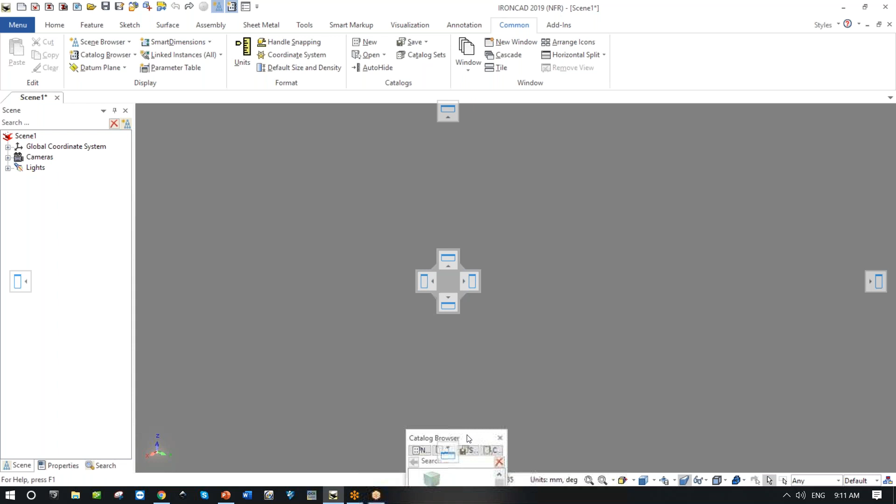Now, I have some friends who like to set this up in a different location, so I'll show you. If I wanted to set it up down here, I pop it at the bottom. Now I have the same capability where I can look at it and decide what I want to do. I want to grab a slot and bring that up. Everything works exactly the same way. And at any point, if I want to reset it and put it somewhere else, I can lift it up and drop it over here.

Here's a quick tip: I've grabbed this and moved it into an open space. Double-clicking moves it right back to where it was. So you can really control how this thing sits on the screen.

I'm going to make it longer this way. And now, I want it dropped back over there. So you have control of that.

If you lose things or can't find certain settings, it's really important to know where the common tab is. It's up here at the top, and you can use it to find and change these units back and forth. That's important.

I'm going to go through some of these things in great detail so you can see them.

Other important things to recognize, I'll show you different things as we go along. I'll go into part mode, but every command matters, and one of the most important things is your keyboard commands, which are quite important. I'll show you some keyboard tips in a moment. But basically, setting up this screen is really important, and you have the ability to add any kinds of things.

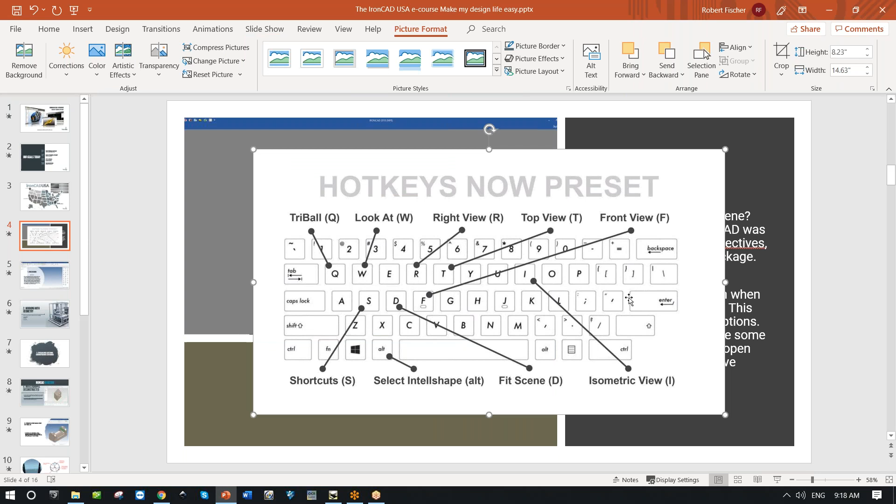All right, this is the one that I wanted to show you all. This is kind of a neat thing that I just want to... these are the hotkeys that come preset when you originally get the product.

And oh, come back here, you silly little thing. Where'd you go? Sorry folks, I've got way too many windows open now. Let me grab that, but where are you, you silly little thing? It went down again. I am looking, by the way, on my other screens for those little guys, but I don't see them, so they're not here. I've lowered everything, but they're not here. So I'll come back to that in a moment.

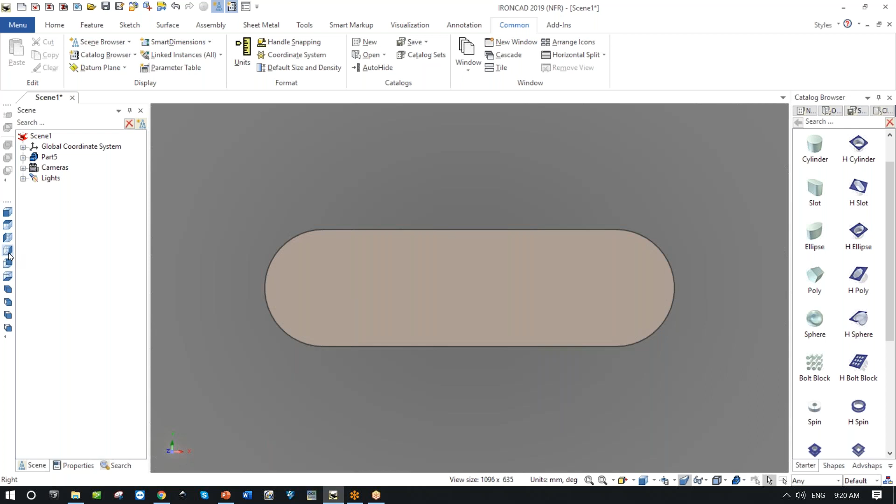And now I've got, let me look at it from here, and I've actually got something which is faster, if you will, and takes up very little space. And I don't know about y'all, but as I got older, I realized that hunting down here and going, oh, I've got to get this tiny little thing and press it, it made it difficult to use. For those of you watching, if I have to find a tiny little button like this all the way down there, that actually takes a lot of time for me, and it's frustrating. And the reason it's frustrating is because it is taking my focus away from what I really want to see.

Oh David, I see your questions in the chat window. Let me get to those in a moment - for example, does it support Siemens PMI? We'll get to that, but we're going to stay in the first half an hour or so in very basic mode.

We're going to stay in very basic mode, and then I promise we'll come to those more complex questions in a moment. David, you good with that? Can't hear you, but go ahead and answer anyway if you want.

Working with that, there's a lot of different things you can do, and as I said, there's these buttons already. I'm liking the way my system is working because I'm getting a much easier result. I'm going to show my face again so you can all see me for a moment - those are tools you can use if you don't have a space ball.

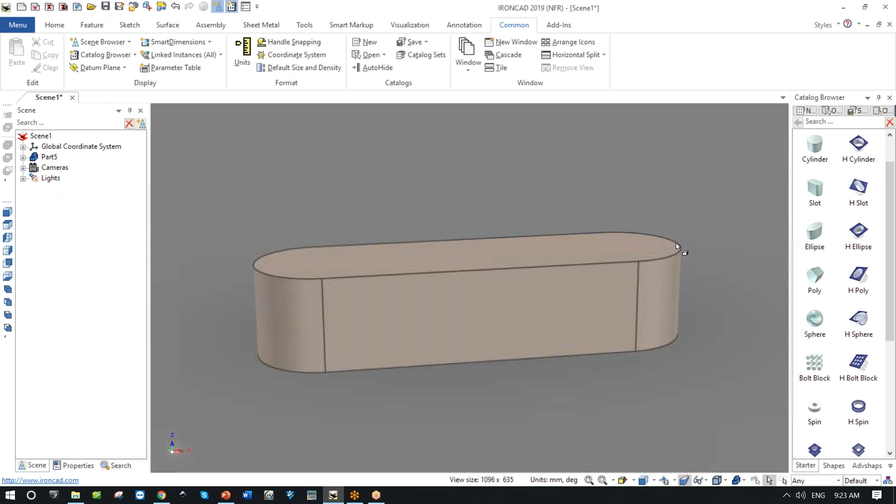So you'll see me working, and as I'm working, I almost never - and this is just me, so it's something I would recommend to customers - for me, I can actually be looking at things and moving them around in a very natural way.

As you're seeing, I'm able to come in and very quickly pick on an edge or something like that and do a quick blend, whatever I'm working on. I'm working in a way that to me is very, very natural.

And if I do things like this where I'm going to say shell, that's just showing you how this is going to work. I'm creating a very simple function because I'm able to control how this thing works at any time.

All right, so back to the scene browser - as I said, I'm just going through these different parts to show you the interface itself. Now, not just the interface - remember, it's not just the interface I'm talking about, but also the way things work and the way the actual objects work.

So we're going to spend some time today in drag and drop modeling, but let's talk for a moment about blocks and how they come in - these features. I'm going to bring in a quick block there. There's my block. One of the things I think people may or may not know is that you can actually determine how things are going to look in the scene.

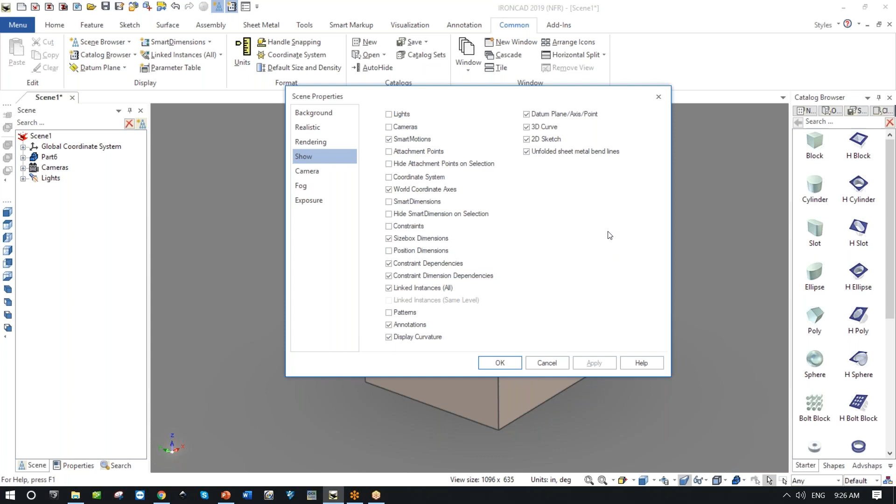So when you're setting up your scene, which is what we're looking at now, I have control over everything. First thing is, what do I want to show? Do I want to show my lights, camera, smart motions, attachment points, all these different things? No, I really want to see the size box dimensions so that when I'm working with geometry at any time, it will show, oh, 25 by 25 by 25. Instead of just this one big fat guy here in the middle, I'm able to see this on any of the things that I bring in anytime.

Oh, where are you going, little guy? Oh, you're very small because I started and switched. How big are you? Oh, it's a 1 by... they're on top of each other because it's too small in the metric system.

So I'm dropping these in, but any of these that come in will automatically have this attached to them at any point. Let me get this back again, and this is that double click. By the way, I'm seeing something out there that I don't like, so I just click and hit delete.

All right, now what else is customizable here? Well, gosh, I don't know - the background. Let me look at the background. Oh, any color that you would want - change the top color, make it white, and go ahead and do that. So now I've got a different color background.

What other things can I do? Quick tip for people who have never done this before: every IronCAD installation comes with a texture catalog. So this is rather silly what I'm about to show you, but why not? What if I'm working and I want to have something that shows a wood background? It looks a little bit odd, a little bit silly, but I've just created a wood background that allows me to work that way.

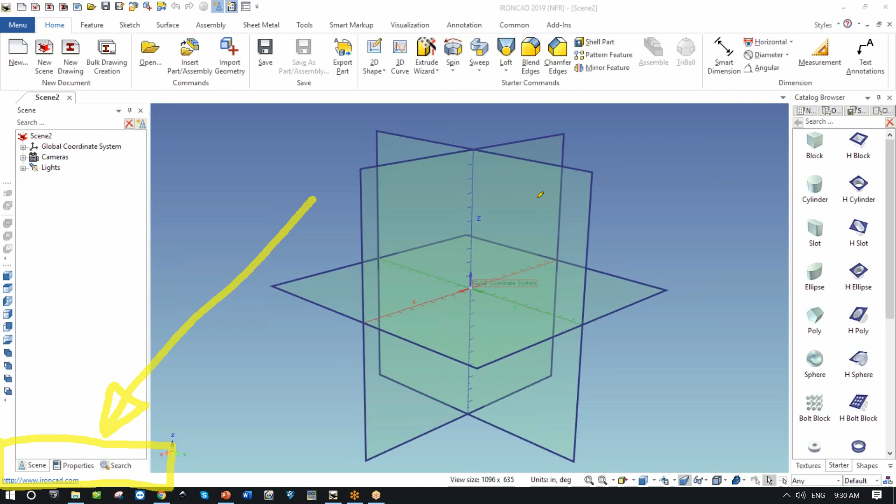And I don't often go here because the fact is I can find most of what I need in the catalogs. But there's also three very important areas I want to show you because it will help make your design life easy, and that's down here. So what we've got is this area, and I'm showing that to you so you can really see it - it takes me a little time because I've got to erase all that stuff.

So what does that actually mean? Well, right now nothing is selected, and this is a rule I really want you to understand: when nothing is selected, it's only showing me the options that are available in this scene right now. Because nothing's selected, I say, well what can I... oh, show me the coordinate systems. Oh, I turned them on, show them to me.

Some of you might have run into trouble where you did that and it didn't work. I'm going to open up a new scene so you can see it and see what happens. This scene is different, and if I say show the coordinate system... I don't want you all to go back and try this and go, gosh, he just showed this to me and now it's not working. So I opened up a new scene and said show the coordinate systems. Bobby, why aren't they showing up on the screen? I want to see them, I watched you do it in the webinar. The reason for that is the following.

There's a right mouse button, which brings up another issue I want to talk to you all about. Matthew, if you're listening, this is one of the most important things for you to know. When you're working with IronCAD, the left mouse button... let me just get whoever that is muted for a moment. Joe? Gotcha.

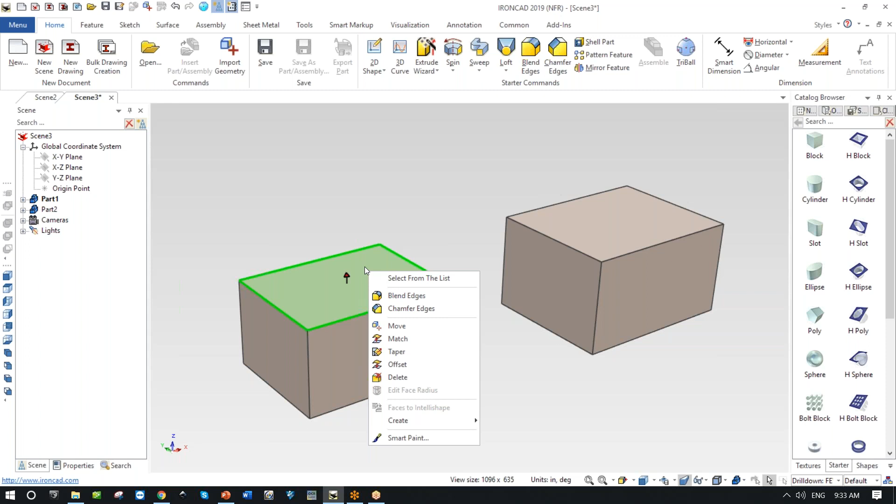So you're seeing it's context sensitive, and the same thing is absolutely true everywhere in the product. So if I'm over here, remember I was really saying, why is my coordinate system not showing up? I'm clicking it over and over again, and it's not showing up. The reason is because over here it's been set, right mouse button, it's been set to hide. So it's hidden when you first open it up. If I bring it back here and undo that, I'm undoing all these things. In any standard scene now, I can show this coordinate system so I can see where things are sitting.

Now for all of my designers sitting out there going, Bobby, you've told me I don't need a plane with IronCAD, we don't need it to sketch — you're right. But sometimes for people who have to export to a CAM system for computer-aided manufacturing, it's important to know where things are sitting. So I'm just showing you this idea.

Now you'll notice I'm able to control the scene this way. So what I'm really talking to you about is not the coordinate system as such, but the fact that you can control all of the things happening in this scene. So everything we're looking at, whether it's the lights that are being used — I only have one camera action, and these are the different lights that are affecting what's happening. I don't want to get into the details of what the lights are doing, but there's a lot here that you can show, a lot of information you can get for the scene. And what's really important is even this idea now.

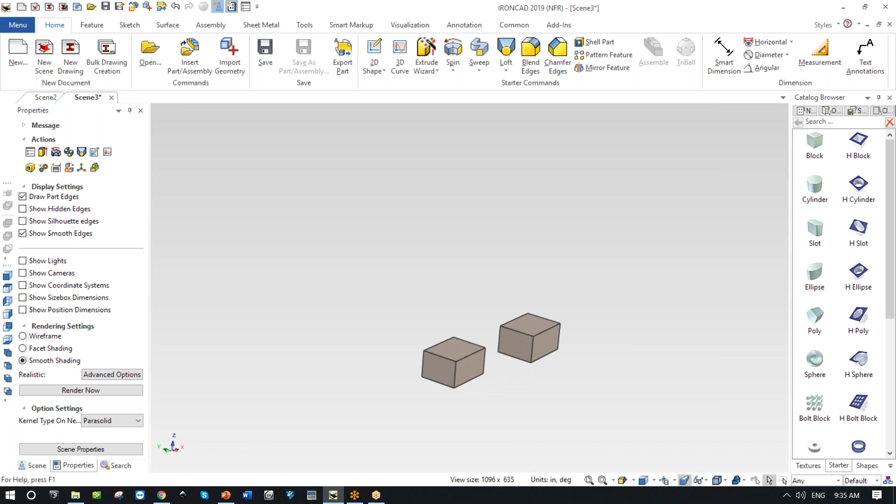The subject of this webinar is make my design life easy. I don't like menus covering up my geometry, because when I'm working on complex geometry, I'm thinking about the problems in front of me. I don't want to be floating through this kind of thing. So I love the idea that, guess what?

You don't need to. The properties of anything that you point at will always be over here. A lot of people don't know this, that the properties of whatever is highlighted right now is over on this side of the screen. You'll notice here I've got this highlight, so it's in part mode, and this is what I can do with a part. All of these features are what I can do with a part.

So the fact is, I could right click and say shell if I wanted to. But the other thing I can do is just come in here and say do this, and the shell will be over here, right up here. All the different things I can do with a part are also here. And in fact, I find it's easier rather than picking through this. Personally, I know that if I'm there, I can just go shell, open up the top, and I'm done. So I shell my part.

Oh, shell thickness is a little too thick. So yeah, it's small, so make it 0.1. I'm actually just having fun working with this, and you can see now anything that I point at. So that's really kind of a neat idea.

Show the dimensions. Now when I get in, there's the thickness, whatever I want, make that bigger, smaller. There's the sizebox. No, I want this to be, there you go. Changing, and I'm actually watching it update live.

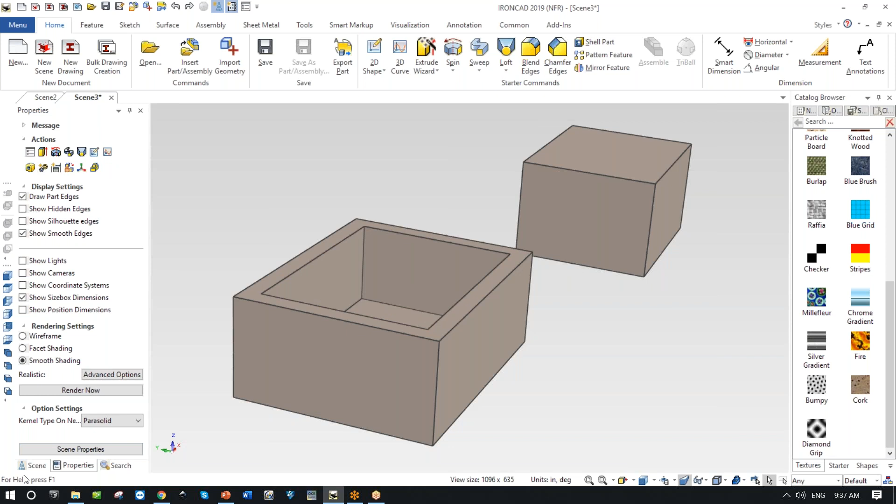But that's the first part of our webinar, really talking about these properties. And if you're interested in how to actually create your own templates and save those, it'll be my pleasure to show that to you at a later date. I'm going to move on. Anyone who wants to see this, you can contact us and ask questions.

There are a number of questions in the chat box that I've got here, and we're going to come back to that. Oh, nicely done, Matthew. I spoke yesterday to Matthew, and he has installed his new mouse. Have you actually installed it and bound the keys yet? Have you learned how to do that? On my personal laptop, yeah, it was super easy. Okay, great, no worries.

That's really cool. So let's move on - are there any questions on the scene? I'll stay here for a moment because I don't want to move off this immediately. The idea was that the first thing was setting up the scene and looking at how it works. That was the first step in what I wanted to show you. So we can, of course, add your own default templates, and as I said, I would show anyone how to do that if they want.

Now I want to talk a little bit more about how this actually works. This is a default scene that we've looked at. We have the history tree, and I'm going to talk more about what the history tree is. Each part has its own history, and this will be clear from drag and drop. We're going to talk about Intellishapes as well.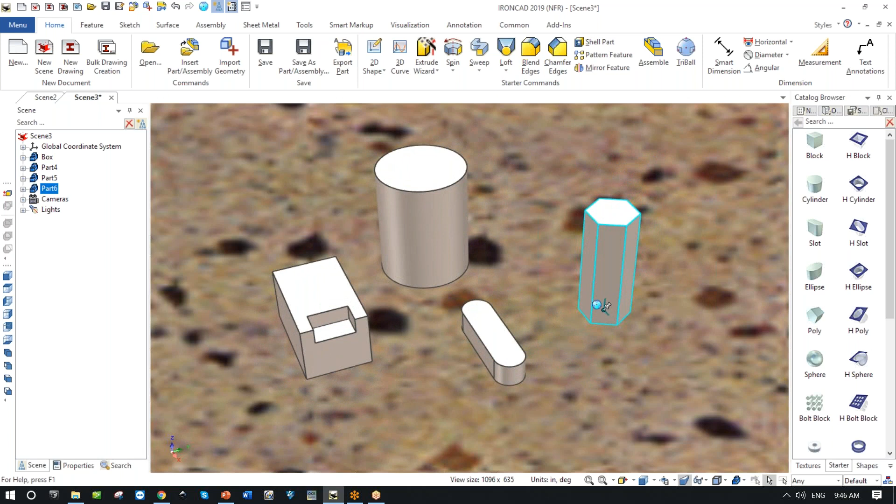We'll talk more about drag and drop and how you can create your own. But as you can see, they're coming in, and I'm dragging each of these into a new location. As I drag them, it's renumbering them, going, oh, this is part 4, this is part 5, this is part 6.

Well, you know what? You guys, shift select, go away. I don't want any of you. Double click, come back to the screen. Remember, T for top, right, front, ISO, all of this.

Well, what happens when we're working with these shapes? What would actually happen - and I'm going to delete this just by highlighting it and getting rid of it - what would happen if I go in and edit the original sketch that was created to do this?

And I think this is a really important point I try to tell people: if this was created by a sketch, and if you're used to using sketches, you know what, you kind of bug me. Give me a background.

I'm just going to use black, just so we can see it better there. Oh, I think my texture is in the way. Hang on. You don't argue with me. I didn't want to save this. Undo until I get rid of it - I want my texture gone. Anybody got an idea how to get rid of it other than what I'm doing?

Just like that. See, by the way, folks, something to know about parts: when you come into IronCAD, this is something that is set as a default. And I won't move quickly because I want you to be able to control this yourself. Number of undo steps, right here.

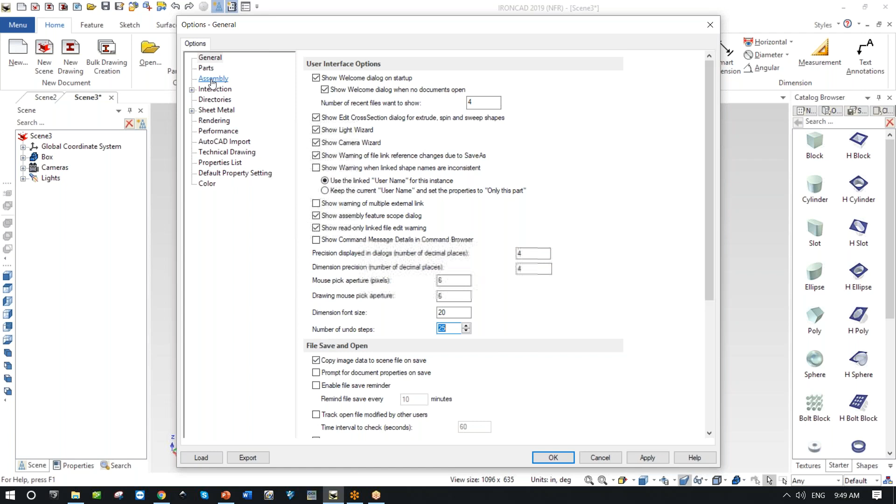This also reminds me of something as we're working with parts. Some people have complained that when working with a part, it doesn't look very smooth. And it's especially true sometimes if I bring in a cylinder. Let's make this, oh, I don't know, 22. And it's a double click, so there it is.

People have often said that if I zoom in on this edge, it can start to look a little bit blocky - you know what I'm saying - and it looks like these lines don't look like a smooth edge. Well, at any time, if I want to increase the surface smoothness of this part, the default is set to 60. A lot of people like to say 100 will make it a little bit better.

And this particular part property, this one was created - let me take a look. Here's the surface smoothness, you notice the 60, and I can take it all the way up and say, okay, go ahead, do that again.

Now, you may not have noticed this over the internet, but as I did it, this became much smoother. So if you're having issues there, these are the parameters you can get at that will help make the parts smoother, more beautiful.

Back to where I was, I just want to bring in a simple block. What we're talking about now is, how was this created? Created with a cross section. Simply highlight the cross section and say, edit the cross section. I'm going to go here and just say edit this. What is it? Nothing more than a simple sketch.

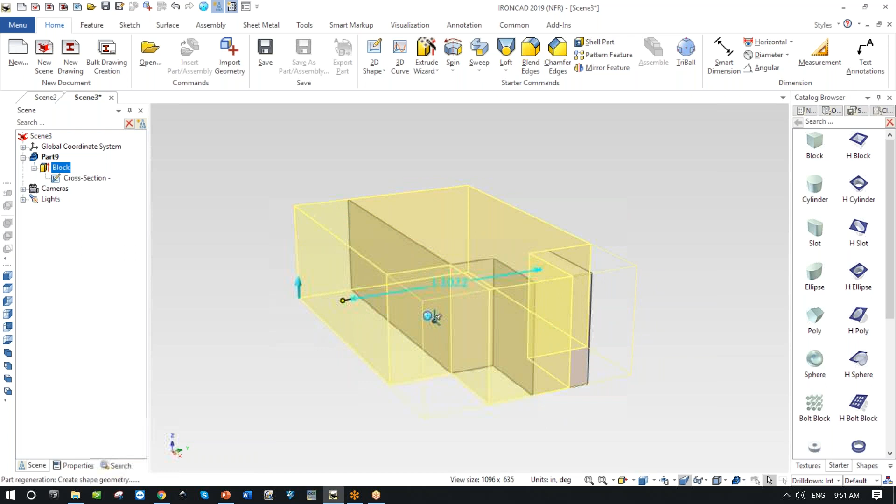When I'm finished, my block feature now has this added to it, because I've taken it and changed whatever I want this thing to be. And now I still have these handles, kind of nifty, showing me I'm able to create. Before I go too far, I do want to show you something quite marvelous.

That is, I have my own catalog here, and we'll be talking about this idea. With my catalog, I could simply say, you know, I really like this block with extrude or something, I don't know, that's what I like to call it, because I'm going to use this again in a future design job. Now what I'm going to do is pick up this block with extrude and put it right there.

Now anytime I want, I've got a new one that I can use. So at any point, if I'm working with different parts and I bring in a part and say, now I want my block with an extrude right there, I've now added that block to this. I'll show you more about what I did, because it's kind of fascinating the way it actually worked. This block had the ability to actually become part of this because it was an Intellishape.

So it's actually added itself to this block. Here's a blend block, and the block with extrude is just another feature inside this particular one, because now, oh, I want it to be blended this way, and now it's part of this. That's a really neat capability, that I can quickly and easily alter and use this as if it were part of the geometry. This drag and drop idea of creating your own features is really very clever, and I've not found it in any other system.

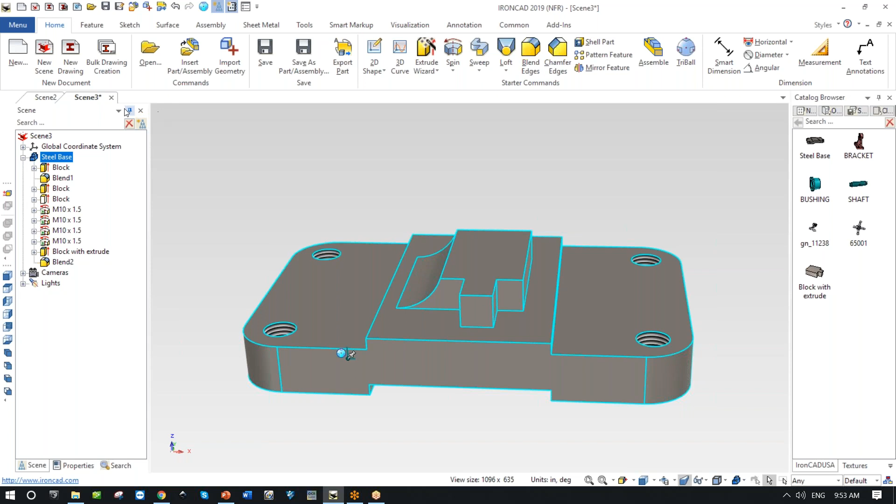So let's actually create a part so you can see how it works. Instead of just playing with what I'm doing, I'm going to come back and say, okay, stop these things. I'm going to start completely from scratch, and we're going to go through and create a new part that we're going to take all the way through so that you can see it.

I'm going to start out with a 3D scene, and this time I do want it to be an inch scene. I know that this one I've got is inch, so I'm going to use Bobby's scene. Why did I like using this one? I'm going to bring out from the simple starter menu, and you may stop me at any time. I'm actually going to just drop a block out here and make it 3 1/8 by 1.5 by 1.5. I'm going to grab this block, bring it out.

Now, some of you who can see this may notice that it's got a bit of a shadow on it down here. I like to know where the 0, 0 is, and this lets me explain something else to y'all. Anyone know where that got dropped?

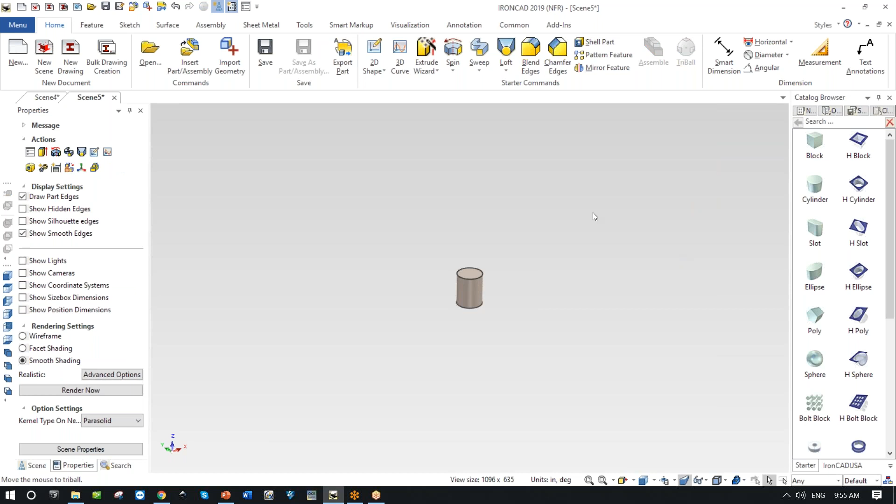Well, if I turn the TriBall on here and say edit the position, it was the first part that got dropped in the scene, and every time it's the first part, it automatically drops it at 0,0,0. I've had this question a lot, so anytime you start a new scene, whatever it's going to be, now when I drop something, even if I drop this cylinder up over here in the corner, it dropped because it's the first part. If I bring up my TriBall, it drops everything at 0,0,0. So the second part that gets dropped, if I drop another part over here with the TriBall off, of course it's in a different location because I dropped it way up here in space. It's important for you to realize that when you first start up, that first drop is actually at 0,0,0.

I have a little shadow down here because I like to know where the bottom of this is. When I turn it upside down, the shadow turns on, so I can slightly see it. If you're not seeing this over the internet, this is where I look at my background or the realistic rendering, and I challenge you all to play with this because it's really fun.

Here's a simple shadow. No, I want it to be a little darker. Now what you're going to see is when I come back, the shadow is getting darker so I can really see. There's a lot of different things here for people that are new that you can play with, like, oh, I want to reflect the part.

Now when y'all first do this, you may or may not see this over the internet, but you'll see a reflection that kind of bugs me, because what happens is it comes in almost at 1:1, so you're seeing a very bright reflection. I'm showing this to you because I don't want you to see it, and I'm not going to attenuate this, because that's very confusing to me, I don't like to see it. So I see extra geometry, I actually turn that off so I'm not looking at it. I've got my simple shadow and go from there, so I can just see where the part is.

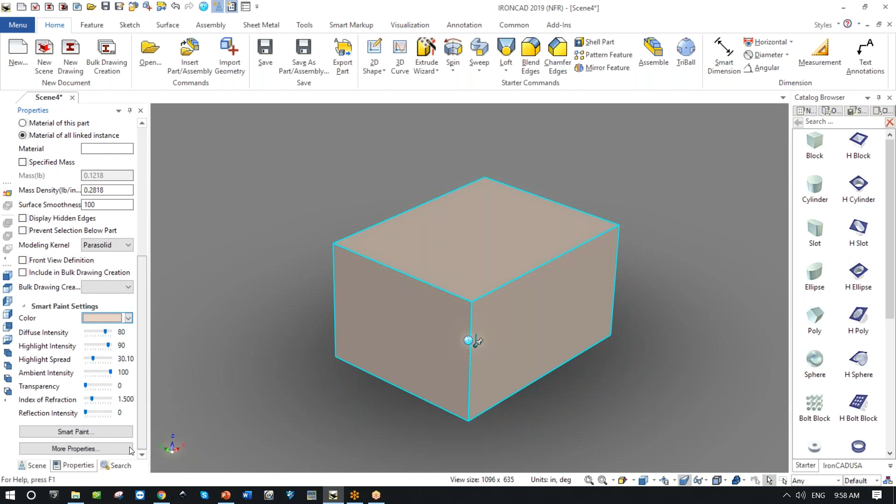I can put all this in one now if I want, or any of the information, I can change its material. There's lots of information that has to do with the part, including a quick access to the color. I want this to be a green part - there you go, I like that color better. Of course I can change all the intensities of the color, or I can use the special feature called Smart Paint, a right click, and I can say, what are the different finishes I could use? I want to make this shinier, what colors, what transparency, because if I want this to be a transparent part, I can look through it. Nope, I don't want any transparency, apply that again. I can make reflections, and I'll show you a lot of this as we talk today. So that's what I wanted to show you there.

Let's go in now and actually start creating real geometry with this. I could show you a really neat trick, but somebody asked me this yesterday, Bobby, if I'm going to create this and I want a rounded end here, how easy is it to create a rounded end? Let's actually look at how we would do that.

We want to add fillets. There's a number of different ways of blending. You've already seen that if I pick once, I get the part. If I pick twice, I get the IntelliShapes, which lets me change the size. Oh, by the way, I forgot to change the size, so let me go right here now. I could do these one at a time, by the way. I could drag this way.

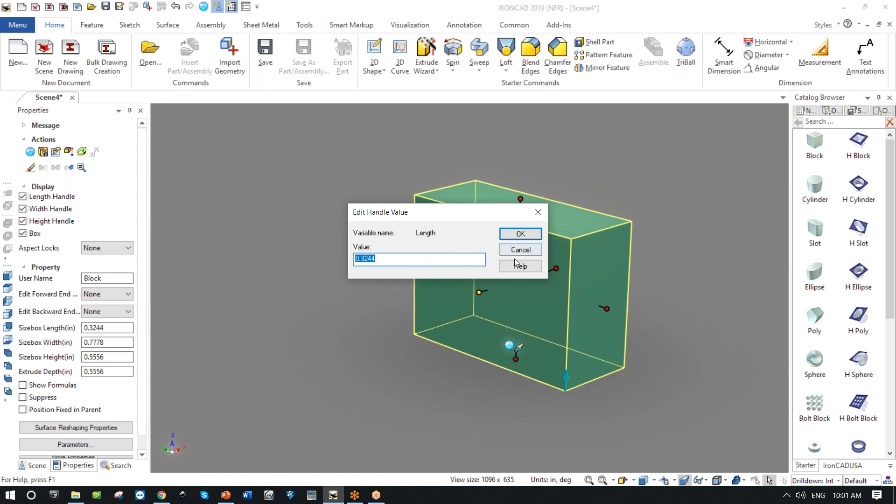It's very useful because right now, what I told everybody before is that I need to create this box. So if I click on that, there's a little option, I can click on it this way, which is more intrusive, or do this, which gives me a box right there, say 3.125. Then it flips to the next one, which is 1.5. Unfortunately, it's off the screen. Bring it back again, and I want this 1.5 as well, but lost a little focus. So it's here so you can enter information in rather quickly, that's the idea behind it. Yeah, that's the entire point, we changed it before. It was a smaller text box, but you couldn't do that rapid prototyping with the dimensions.

So again, I'm going back to something I pointed out earlier, that I'm looking at this box and I wanted to make it 1.5 by 1.5. This is kind of a neat way of working. Mike, I know Mike Beechler, I know you're listening here. I kind of like having these on because I can double click just on this size, brings up the whole size box here, and I realize that what I've done is 3.125 was supposed to be the size that this thing was that I'm making. Kind of neat here. So the question that I've got is, and by the way, every single thing you're looking at is available. All of these lessons are available on one of our IronCAD USA partner sites on the TechNet site. So all of these examples, everything that I'm going over today, every example that I've given you is meticulously detailed on the TechNet site. So if anyone's interested in looking at these examples and going over them again, in addition to the recording, you'll also be able to see them that way.

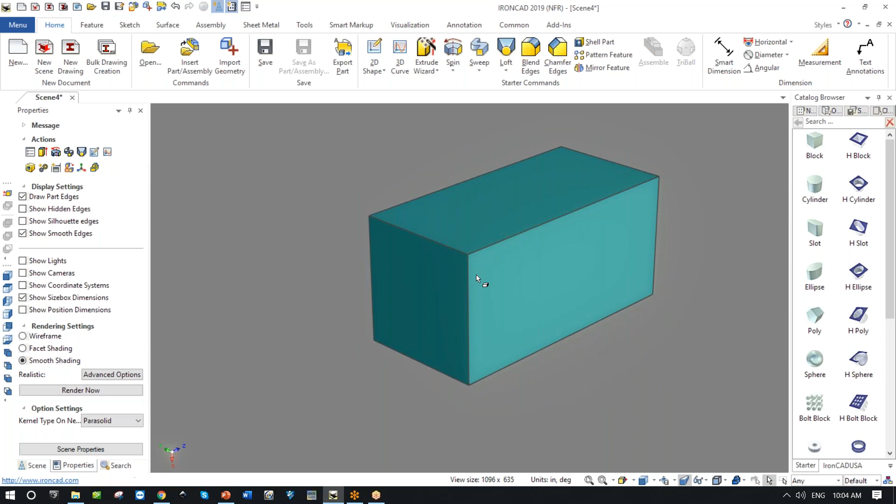Or I could right click right here. And this to me, I think the other thing I could do, by the way, is S. And so as I'm working, is there a way for me to drill down directly just to get the edge so I don't have to go pick? I know there's you can use Alt click for feature level. I'm not sure about edges though. Not edges. Okay, I just wondered, and I'll ask questions as well.

So I'm on this edge now, S, I want to blend it, and I want to make this, let me just take a look. I'm going here and make 0.75. So I'm going to go 0.75, bigger, great. And I also want to put one down on the bottom here. And someone may say, well, would that create, no, it creates exactly what I want, a really nice round the way I wanted it.

Here's a neat trick that I want to show people that have asked this question. I now know that I want to create something on this edge here and this back edge that I don't see. So a little trick is this one. Highlight the part, Control E, turn on the edges. That's what Control E does. So now I have my edges turned on. The reason I like to be able to do that is because now, well, what did I do before?

Come in, select on this edge. I like right clicking. I could also blend this edge. Yep, 0.75, sure, perfect. Is that what that's supposed to be? Yeah. And same thing, and look now I'm picking through the part and grabbing that edge, okay?

Now, for those of you who don't want to use that little trick, the Control E, there's another way of doing that. I'm going to show it to you because, if I wanted to round and I say, okay, I want to blend an edge, I want to do this one and I can't see that other edge, Control Alt Pick. Isn't that interesting? I'm holding down the Control key and the Alt key, and then I'm picking where I think the edge is.

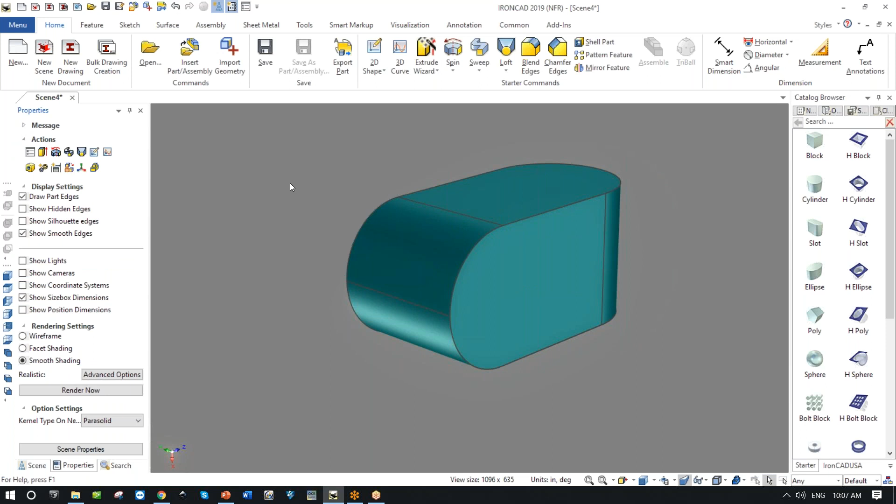And that actually kind of fires an arrow through the part, if you will, because I started, and I'm going to show that to you. It kind of fired an arrow. This was my entry point, and it fired an arrow through there. And everything it saw at that point, it gave to me in a menu box. And I think that's a really kind of neat feature. And so I'd like to show you all these different things that we're working on that make my life very easy when I work on parts like this.

So up to this point, what have we done? We built a block. We did a blend on one end. We did a blend on the other end.

Another question for you that I have from a friend of mine. If I were to do something, I'm just going to do something for fun, folks. This is not part of the presentation, but I want to show it to you. I'm going to highlight this edge right here and say blend. If you'll notice what's happened here, I've done this, and I'm going to say, well, that's too big. I'm going to make it 0.125, just a little guy. And I say, great, do that. And I've done this, which is kind of neat. Now, if I highlight this, I get all these. Now, see, they sometimes do this.

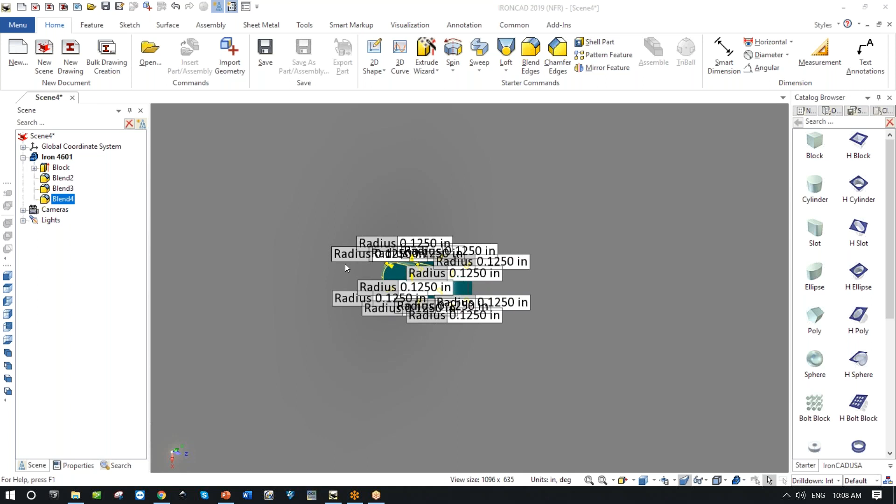And that creates a little bit of a difficulty for me. Is there anything that you know of that I can handle here, Blake, to remove or make these smaller, because you notice they've entirely covered up my geometry.

Yeah, no, that's not a current feature I know of. Those text boxes are primarily for people to be zoomed in on a part. We don't have any automatic scaling or removal, so because each one of those is editable, you can't do it.

Oh, so in other words, I can actually right now come in here if I wanted to and make this 0.25? Yeah, if you want to. That would be weird, I don't even know how that would work. But okay, I get what you're saying. Oh wow, that's pretty interesting. I wonder how it did that, but okay. I'm with you, I hear what you're saying.

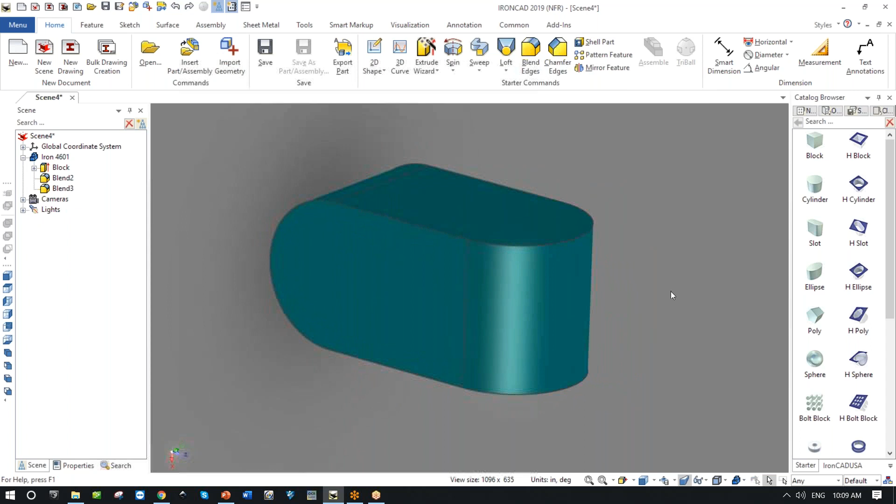And if I want to cut that all the way through, I cut a hole all the way through the front of the part, or if I just drag this all the way through this way, you see very quickly I've just cut through this part. This is something really fascinating because I found I can draw almost anything with IronCAD just using these shapes.

So I'm going to take a block here, and this is going to require that I drop it right there. This is the block. Now, for those of you who are... yes, go ahead.

If you check the chat, I actually asked you to make a sheet metal box with a pyramid hopper. That might work for this if you want to do that. You know what I'm going to do, is this Matthew? Yeah. Matthew, I will come back to that.

Okay, no problem. What I'm doing right now, so everyone can see this, because it's kind of important - I want to make sure that what I'm showing you at the moment, you can all get back to. That's what's really important. I want everybody to know that what I've done and what I'm doing here as I'm working on this part is done in a way that every single person can come back.

And if they want, they can go to our IronCAD USA partner site, Joe's site, and go through these and see what did Bobby do, how did he do that, what was it that he actually created. So I'm going through these right now in a measured way so that y'all will have a chance to see how this actually works.

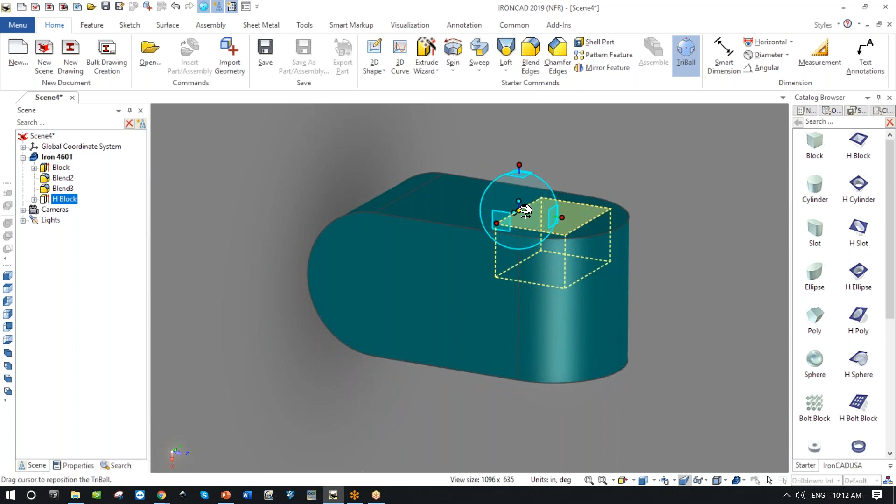I actually want to be able to control where that top edge is, and I'll be showing you how to do this. Now I'm going to pick this up, and put it on a point right in the front here. That's where I want it, because I want to be able to move it down. And in fact, you know what?

Take this and I want to place it right between the top of this and the bottom. I want it in the middle. Beautiful, it's exactly where I wanted it. Now reset it to the anchor. Good, and I can now use this part.

I'm going to turn the TriBall off. And as you can see, I can now start cutting into this part with impunity, just moving in and cutting away from the geometry. And you know, I'm not being very careful about how I'm doing this, you'll see what I'm doing.

I'm just able to control where this will go using the TriBall, and I've made it a cut this way. And all of the things that I'm doing now, you'll be able to look at. What other examples of negative shapes?

A cylinder. This lets me show you something very important for people that are new to IronCAD. IronCAD has a built-in inference engine, and the inference engine means that it infers that it knows what we're doing or what we're thinking. I'm going to show something to you now.

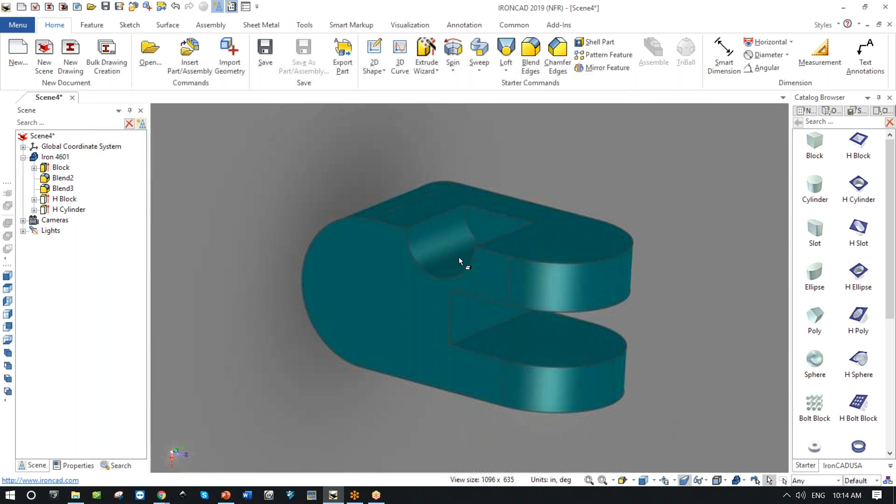There's the way that this face points. So I want to show you something. When I put a negative shape in, I want to put a hole right in this face. So what I'm going to do is just start out by putting it there. Oh, that hole didn't go in the right way. Why'd that hole go in on this side? Well, it went on this side. Even though I wanted it on this face, it went on that side because this face here was facing more to me than the top face was.

See that? So in theory, if this face is facing up towards me, I can do the same drop, and now watch what happens. Now, of course, it knows that it needs to go normal to that top face. So just as you're putting in negative shapes, be aware that the way they drop has to do with their anchor, but it infers which way you're going based on which way this face is facing.

So if it's looking straight up at me, when I drop this into this point, and by the way, that's another important thing - when I'm dropping geometry, it's finding things. I can drop geometry in space, which doesn't make a lot of sense for a hole, drop it in space. I can drop it anywhere on a surface.

Oh, look what it's doing. See this one, it's inferring the normal of that surface. So I'm dropping it where the normals are.

But what it also does is it looks for logical points. So this is a logical point, this is the center point, this is the center of that plane, this is the midpoint of that edge, this is the center of that circle. So you can see anywhere along here, I can drop this geometry.

And what I'm going to do is say, drop it. Make this a, I don't know, a 1/2 inch hole. And now we get into some very interesting ideas that I want to talk to y'all about.

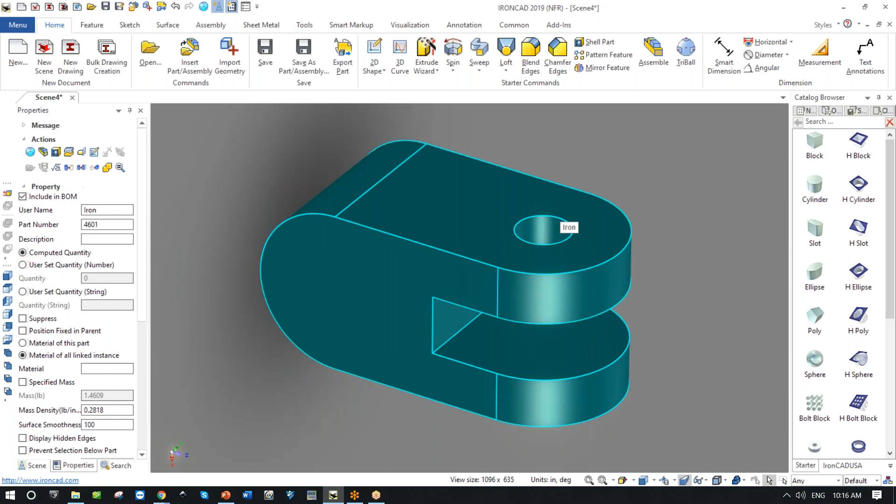So now, by the way, let's get back into that command, just like that. I click on the part, I click on that feature. And the same thing here, folks - if I touch this, well, Iron 4601, that's the part, but I really want to look at this cylinder. So I have two ways of getting to it: highlight the part, highlight the cylinder. Now I'm in the IntelliShape.

The reason why I wanted you to see the IntelliShape, located here, is because I can drag through material. I can make this a blind hole, if I want to do it that way. I can also say, gosh, I want this hole to go a little bit deeper, maybe I want it to meet the first surface. Well, where is that first surface? I'll hold my shift key and it finds that. So it now went down to the bottom of the part.

Remember I said this is an inference engine? There's a lot of knowledge built into this product. Remember when we talked early on and I said I like to keep the properties window open? The reason is everything I do in IronCAD will show up over here. So this is kind of neat.

Now I drew your attention to this blue arrow. I'm going to highlight it so everyone can see. This is the blue arrow, and the reason I want you to pay attention to it is that it shows where the extrude starts. So over here it says edit forward end condition.

What does that mean? I want to extrude to a distance. Oh, I want this to extrude to exactly 3/8 of an inch. And I enter 3/8 of an inch - I don't have to type 0.375, it works it out for me. So that's one way I could do it, right from there to a distance.

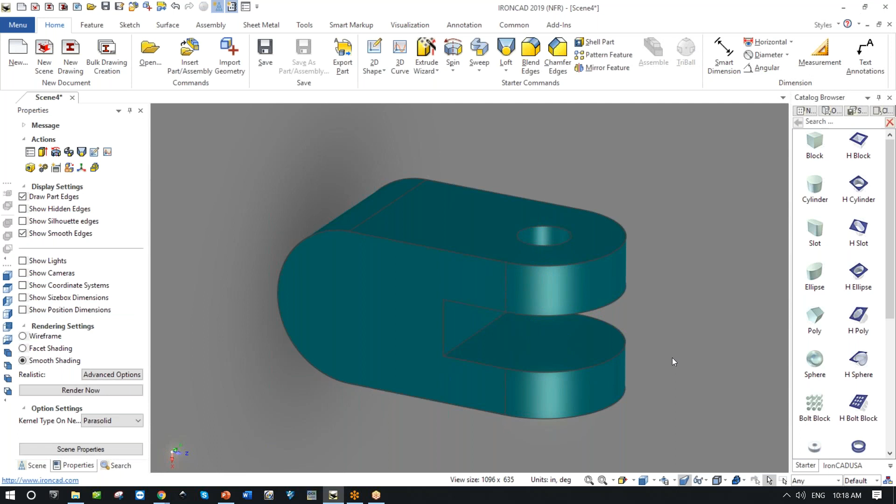Yeah, go ahead and finish that. I'm happy with you. Oh, no faces selected. Select this one, finish. So now you saw it, right? It extruded to that face.

If I wanted it to stop short of something - so you're seeing this incredible power that's built into these shapes. And for me, I always use this one because it works: just go through the whole darn part.

I forget how long it was, so now I've been able to bring in a hole, and just to show you all how easy that is from the beginning, I say okay, get rid of this one - I don't want that cylinder anymore, delete it. Bring in another cylinder, pop it into position. There it is, make it 0.5.

And for those of you who are power users, I usually just right click right there and say extrude through the part. Another way to work - it's just that I happen to be working there. So there's a quick one.

Same thing again on the other side. I'm going to bring in a bigger hole so you can see it - bang, where is it? Put it right here. It highlights that. And what do I want to do? Same idea, extrude all the way through the part. So that's a quick way of getting these all the way through very fast.

So there's my very first part. And before I go any further, I want to take this first part we've done and create a quick drawing. By the way, as I've shown you before, all of these come with drawings complete, so you can look at how we went through these different steps, and you can also get some great lessons here that you can look at in a moment.

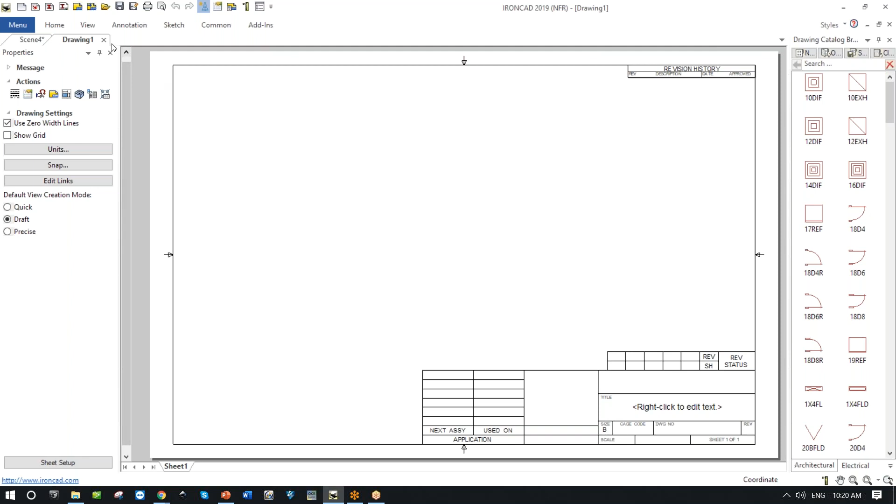Well, the first thing we have to do is save this part. So I'm going to come up - there's a number of ways of doing this, a number of ways of saving the part. I like this little icon up here, or I can go Control S and save the part.

And it says, because this is the first time I've ever done this, I'm going to come back and say, well, I don't want it to save here - this is not my default directory. Oh, because this is a training class, I'm going to come in here.

Remember where I'm going, folks - I'm going to look for this key right here, which is the options. For anyone new to this, I hope I'm not driving you crazy with my drawing so much. But I'm going to come in here and say the directories - what is my working directory? No, I want the webinar file, or use last open directory as the work folder.

That's kind of neat too, because then it'll bump around. But no, for me, I'm going to come in here and I happen to know that I actually want to work on my D drive because it's got a lot of room. And I'm going to go into this IronCAD USA folder.

I want my webinar files to be my working directory. Apply that. So now when I come to save this little part, okay, looking at it right here, put it up on the screen. This is the way I want to preview it to look pretty. This is my pretty preview. And so go ahead and save the part. Notice now it's saying this PC, Data D, IronCAD USA, webinar files.

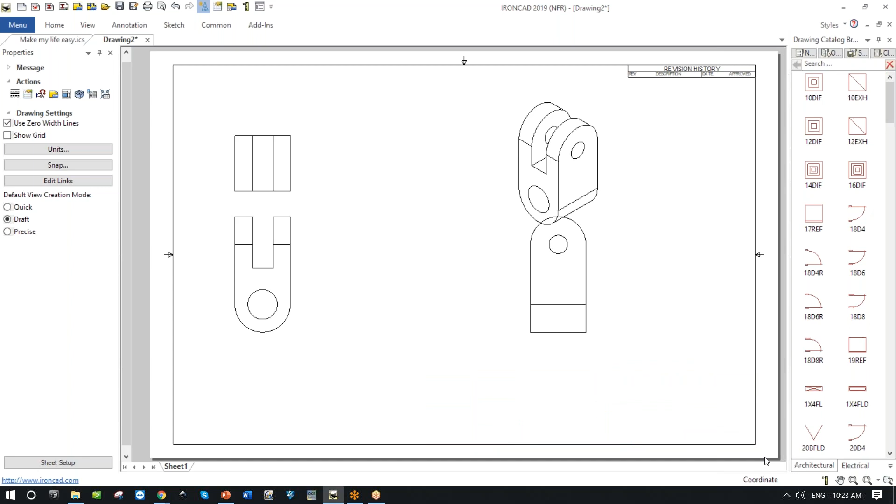Good. And for those of you who are just beginning with the product, you know, these are the default templates that come up. And of course, we can spend some time. If you don't actually want something, you just delete it. I'm just grabbing this stuff, moving it, and saying, oh, I don't want it. I just want this sheet.

And the other thing about the sheet is you can just highlight a view like that, pick up this little icon and move it. Now be aware, if I'm trying to move it horizontally or vertically, I can't, because it's a projection of this view. This one, let's talk about this again.

Remember, when I first started the webinar, I said that this property area over here was important. The reason why I think it's really important is because I don't want to have to search through a lot of menus. I find that a little bit difficult. But I know that if I highlight this, the same rule applies.

Oh, there. Make this a shaded rendering. Good, perfect, got that. What else might I want to do? Put in my annotation bar.

Hey, Blake, you there? I'm here. What's up? How do I get this to stick? I don't want it to be auto hide. It's auto hiding on you? Yeah.

So go back to it. Go ahead and click on one of the tabs. I have some of these as the default. It should automatically stick. Can you right click inside? Oh, go back to it. If you have, right click in the background somewhere.

There is a hide ribbon panel name option. You don't have to answer right away, come back to me. I just noticed this, it's just for me. I noticed it yesterday and I was like, why did that happen? What did I do? And I've had this question from other customers. It's like, something changed, why did you do that? I don't want it to change.

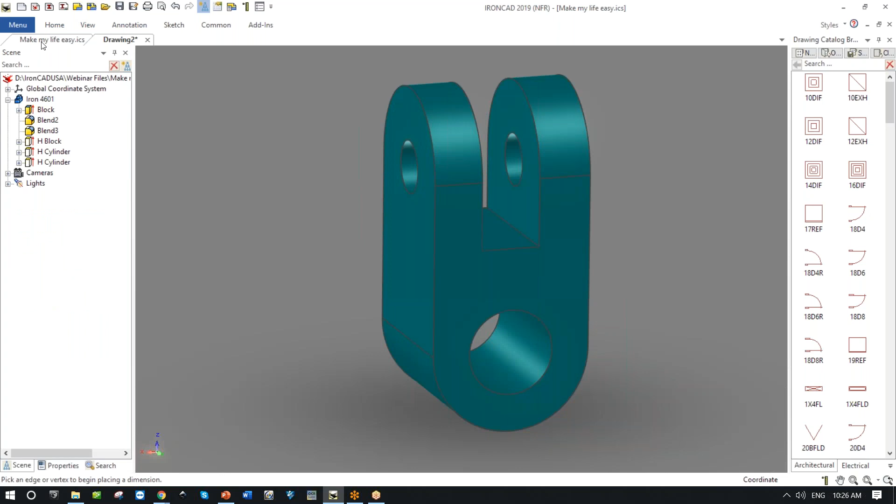So I have a drawing, and of course anything that gets changed or altered, if I'm making changes to this part without updating that, it comes up and says, oh, what's going on, why is this highlighted? Well, if I look at this, it says the views have changed. Yep, everything's updated. And of course, it's now 3.835. So, and if I go back and make changes to that, it will change as well.

So are there questions that I can get from y'all right now before I move on to the next section?

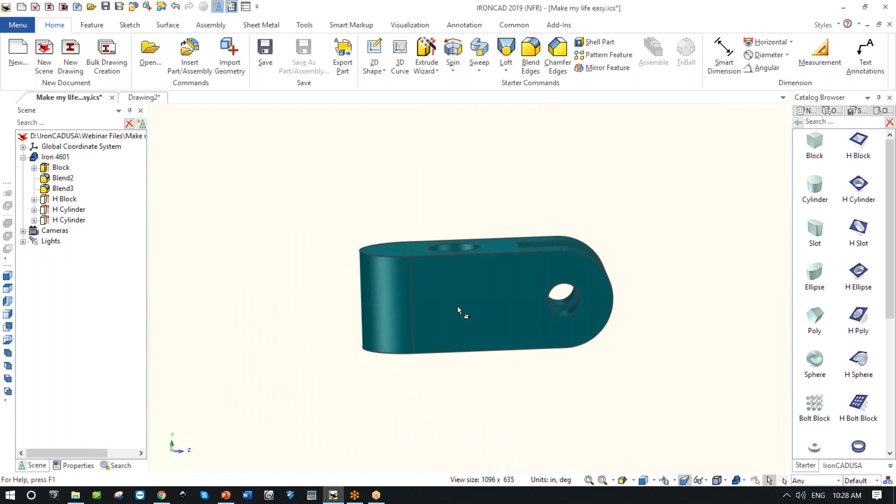So what I have people asking me is, Bobby, if I want to annotate this right now, I want to come in here and just do some very simple PMI. I don't want smart dimensions, but could you give me a quick rundown of what these dimensions in here, what are smart dimensions for?

Sure thing. Smart dimensions are great for just doing basic measurements and for parameterizing your parts. I can't really take control of your screen, but if you go to the measurement tool, you can measure things. I'd be happy to show, if you can give it to me for a couple minutes. So measurement tool has a lot of functions in here. You can do things like measure the lengths of curves, faces, areas.

Everything you do with the measurement tool does not record it, and every time you exit the tool, it will delete any measurements you make. But for smart dimension, you can have these things lock, and then you can also edit them to change your sizes. So if you come in here, you can lock it, and then edit and change the size.

What happens with that too is you can also use these smart dimensions to create parameters. There's a bit of a complicated process, so I'm not going to go over it, but you can parameterize your parts and edit values and expressions to change your part dimensions. You can do ranges with them, and anything that locks the dimensions can be used for mechanism mode, so you can test and see how your part would actually react in real life. That's just another one of the uses of those tools.

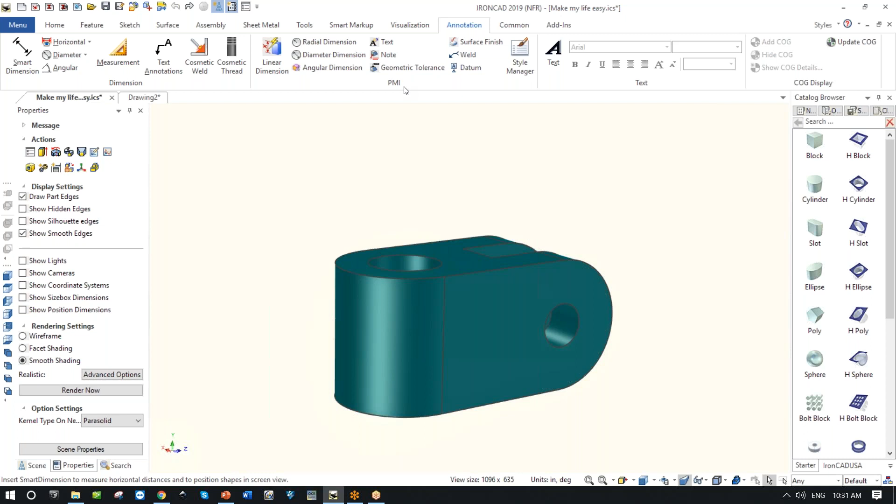Which one? I would use a PMI, but it wouldn't hurt having smart dimensions just to ensure you have the correct dimensions, because you can edit from smart dimension.

So the idea is, if I wanted to just show this, the question is, I've had people ask because this is a little bit difficult to place. This one went down in that way. Would there be a way? Can you perhaps demonstrate? I don't want to put you on the spot, but could you show a little bit how to use this so it comes in the right orientation?

I think it's based on the camera orientation when you use these. I haven't used them too often. This is not one of our... they get asked about too often.

Okay, but yeah, anytime you have 3D models like this, that would generally be sent to a shop so they can view it. So I haven't ever worried about it, so I'm not too familiar with it.

Don't worry. What I'm going to say, rather than put you on the spot, is that everything I'm doing today is just the basics. I truly intend to get to a point where, in addition to the basics, we're going to have classes on advanced usage of the product. So this is just for beginners, for giving you some ideas.

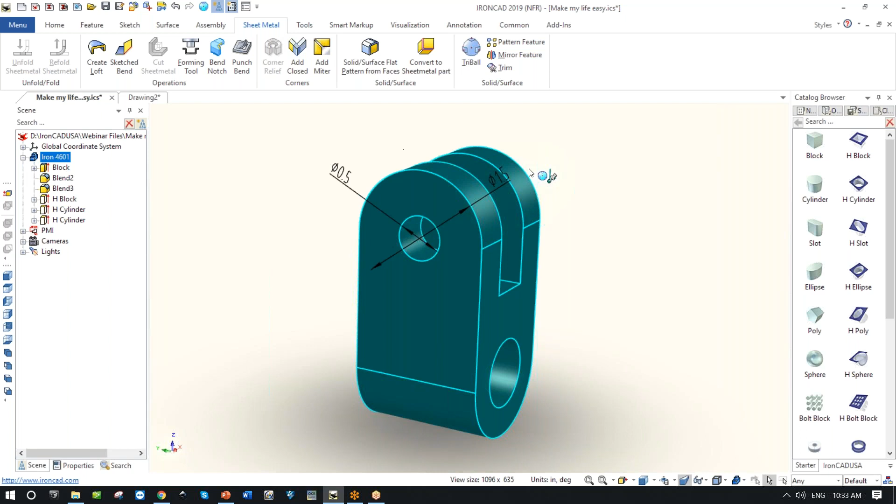And then within a month, we're also going to be running advanced courses, Matthew, advanced courses on stuff like sheet metal that are specifically for sheet metal. We've got about 20 people in this webinar, so I'm not going to get into specifics today, but you and I can explore that kind of thing later down the road.

Bobby? Sure, yes please. This is Matt, sorry to interrupt, looks like Brian has a question in the chat box. Absolutely, thank you. Can you read that to me? Because my chat box is...

He says, with smart dimensions, can you link dimensions such as the two holes? With smart dimensions, no. If you're going to be linking holes together, you would probably just take the feature and link it itself. You could also have it be linked from the catalog too, but linking with smart dimensions, I'm not sure that's a thing. You could use a parameter table on two existing holes and then make those equal, but just by using smart dimensions, no.

Well, let me see if I understand that correctly. What was the actual question, Matt? So if you want to unmute Brian, maybe he can get a little more in depth as to what he's asking. Hey Brian.

Brian, can you hear me? I was on mute, hold on. No worries, I got you.

Cool, yeah, so on the two cylinders, if you wanted to dimension them and have the one dimension follow the other, you said you could make those equal? Oh, so you want the size of this one to be linked to the size of this one?

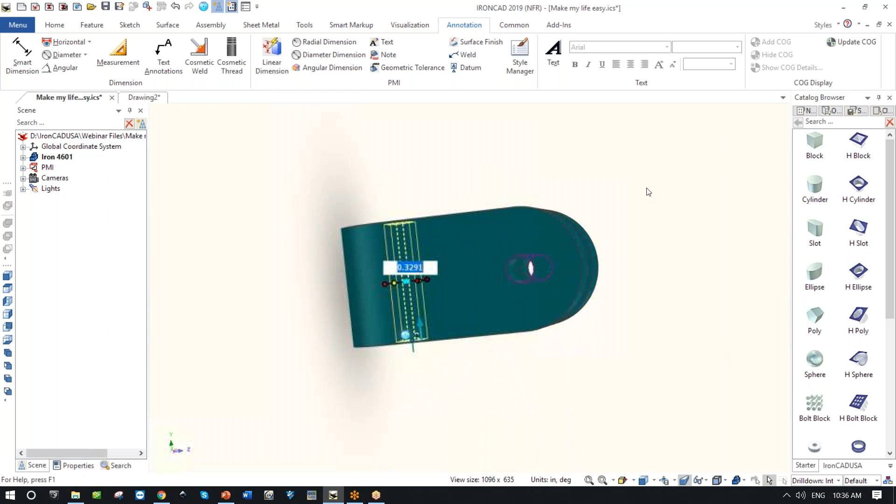Now, if I want to take this thing and make it perpendicular to this, go the other way, reverse. So all I did was put this hole in there. Now, of course, anything that happens to this hole automatically happens to that, because that's a linked copy. You with me on that, Brian?

Absolutely, yep. That's interesting. I was kind of hoping that when you go to hit the size, it has that function where you could say, with that FX, you hit the function, and then make it equal to another feature. That's what I was trying to figure out, because it does work that way in other systems.

You know what I've done? I've taken note of what you've asked, Brian, and I'm going to come up with an example for you. You can actually do that, and I don't want to get into that today because I've got a lot to cover.

What Blake was talking about is that it's really possible to look at all the parameters for any of these cylinders that are created. I haven't used any parameters yet, but if I did, I can make one thing equal to another in this parameter table, or I can describe a relationship, Brian, between this hole perhaps and this front face, saying if this changes, then that front face needs to change, and so on. We do have a lot of that kind of capability built in with the parameterization.

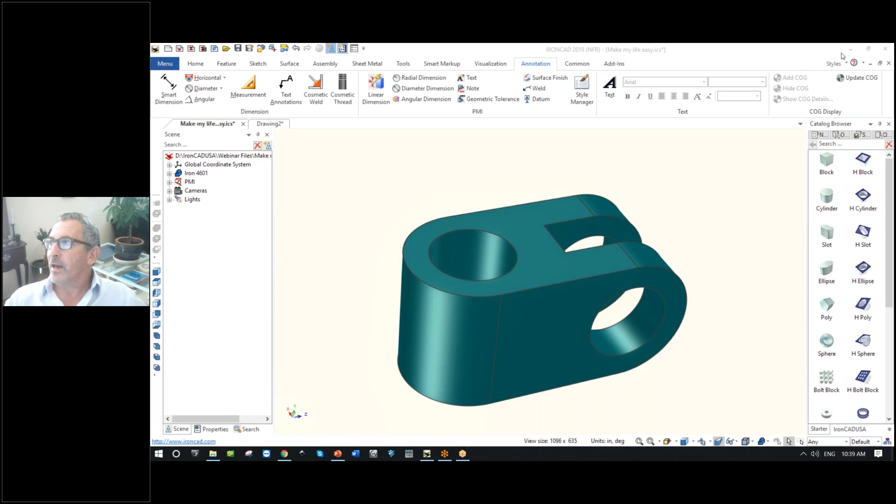So let me, if I may, move on to one new thing. I want to talk a little bit about sketching. I'm not going to go into great detail on sketching, but I want you to see something I think is really important. Give me a new scene.

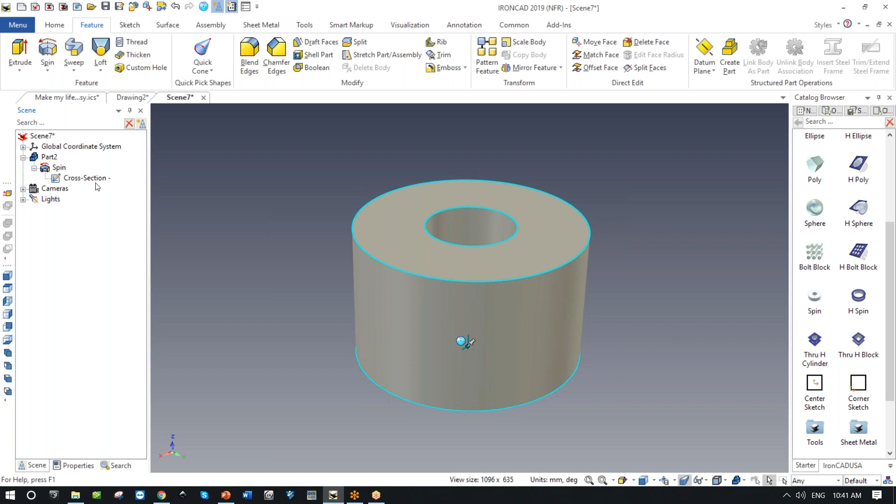Well, I don't work that way. What I do is come in here and grab a spin. There it is, I know I got one that's already created for me. And because it's already created, I happen to know that spin was created using a cross section. Anytime I want, I'll come in here and look at the cross section. And of course, I don't like the way this cross section looks, so I'm going to fillet this.

Hey Blake, are you still there? I'm still here, what's going on? If I want to create a fillet, like right now, it's doing this draggy thing.

Can you show me how to fillet that? I want to put a fillet on all four radii. Do you have a dimension? Yeah, half mil, that's good. Perfect, so you lock the radius. Yeah, you can lock it and then just click the edges. That was very cool what you just did, thank you for that.

No problem. By the way, folks, I'm not afraid to ask ever. I'm taking the mouse back, young man, if I can find it in one of my four screens.

So what I just did was interesting, and I want the default for filleting on a sketch was that the radius wasn't locked. So when I picked on an edge, it allowed me to do this thing, but it's killing me, I'm getting this bounce back effect that I don't really like, and that's not what I wanted. So again, coming in, fillet, lock the radius. Now is there no way to select in a box? That would be cool.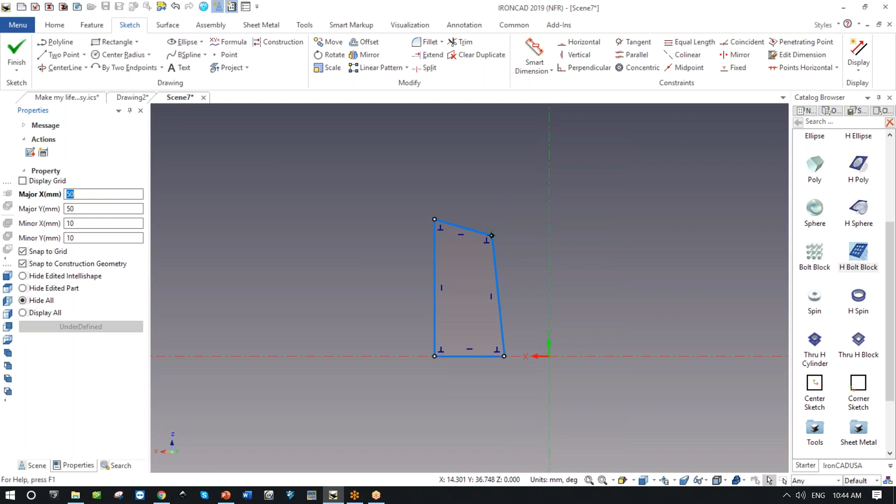Tell me what you mean, Joe. Right mouse button and pull it. Put in fillet. Grab the fillet, now with the right mouse button, pull it in. Now you can edit it.

Very cool, and you can do that with virtually every 2D entity, like in a radius. Just throw a radius out there, use your center radius and go out in free space. I like that, I like what you showed me, that's really cool. Or I can do it this way, which is just left mouse button, so if I just grab, center radius out in space. No, put it out with the right mouse button.

Oh, I remember, and now when I do this, it brings up, oh yeah. And the reason I like doing that, I remember what you showed me once, that if I'm putting in a polyline like this, if I do this and use the right mouse button, it brings up this, and the slope should be whatever it may be, exactly.

I don't care, 150. That makes everything so simple, so simple. And in fact, you go to other products with them.

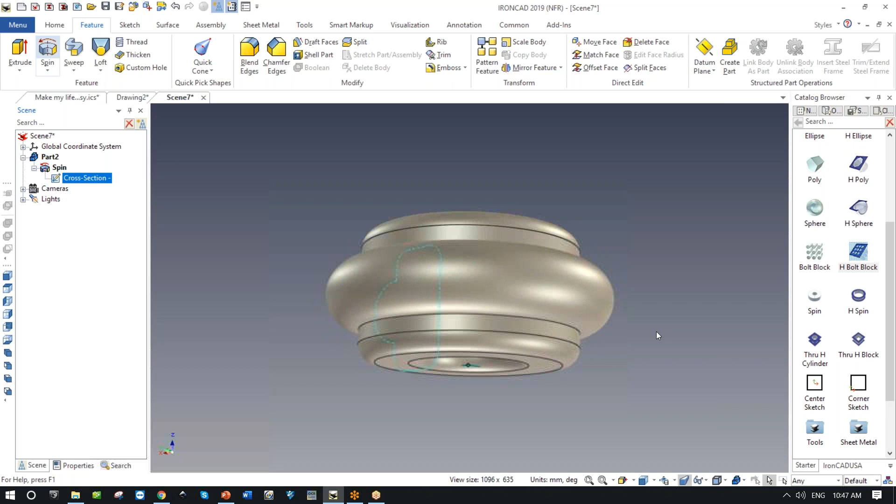The reason I'm doing all this, if I show y'all, and just escape for a moment, there was the original part that I created, remember? So we're trying to learn how to do a spin. When I finish, what it's now done, as you can see, is there's the way that I can create a spin.

So what I'm trying to show y'all, especially for the newcomers learning how to use the product, is our streamlined sketching mode. Any of these things that are built here, doesn't matter what they are, whether an ellipse or a slot, if I bring it in, I have the full ability always to come in and say, how did he create that? How was this slot created? And at any time, if I don't like the way he did it, I'm going to delete that.

And by the way, it's showing me everything. I can hide it over here. And now I just come in and say 2 points. I want this slot to look a little different, this way, and done. And now I've taken an original feature and, as you can see, changed it.

So when I was first learning this product, I found it really easy for me to come in and say, what are all these shapes? How did they create all these shapes? And can I go in myself and alter what was created to suit something that I'm working on? Or more importantly, to teach myself how to work with these different things that we're seeing here, whatever they may be. So that's kind of an important thing.

The second thing is this drag and drop, because what I'm showing you is really drag and drop modeling and streamlined sketching. All of the sketching can be used for really pretty marvelous things. As an example, I'm going to go right back into our starter and say, bring me in a block. And I'm going to use something very simple here.

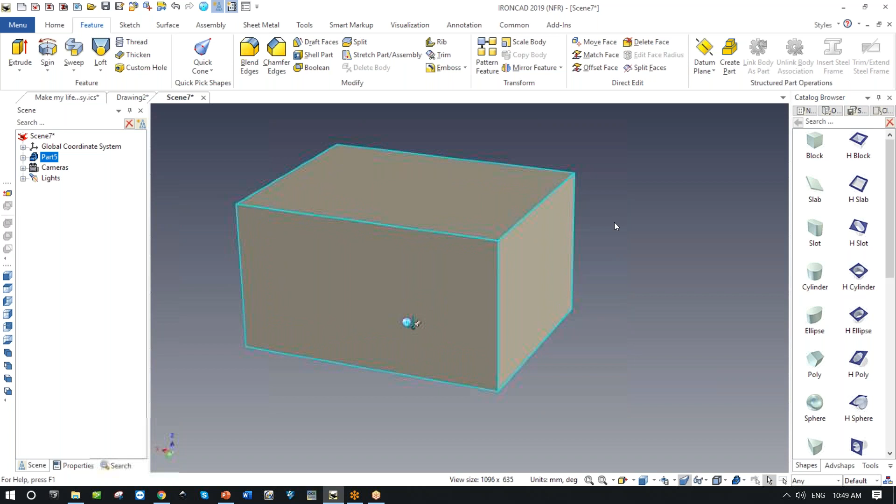If somebody said they want to sketch, here's a really neat idea. I just want to sketch on this shape. Yes, sketch on this shape right there. Good, that's what I want. Let's start the sketch. And now show me my part. And of course, now I can actually use different parts of this.

I can say, you know what? I need to grab—and I'll show it to you here—I need to grab something from 3D space and bring it into 2D space. So how am I going to do that? I'm going to say, okay, project this line and this line. Perfect. I might want to use that line for whatever reason.

Or if I'm not even interested in using that geometry, I'm just going to do exactly what Joe said a moment ago. I'm going to start up clear here. I'm going to come down like this. And this time I'm going to say, oh good, the slope, I get whatever these things are. I'm being very goofy about my sketching right now. Why? Because I created this sketch, and what might I want to do with it?

Well, what can you do with the sketch? I can extrude it, and this brings up the option to remove material from this part. So I just touch it, and that's great. Done. Oh darn, it went the wrong direction. Of course you could reverse it, or just grab these handles and pull through. So I've now used a streamlined sketch to just pull a face off here.

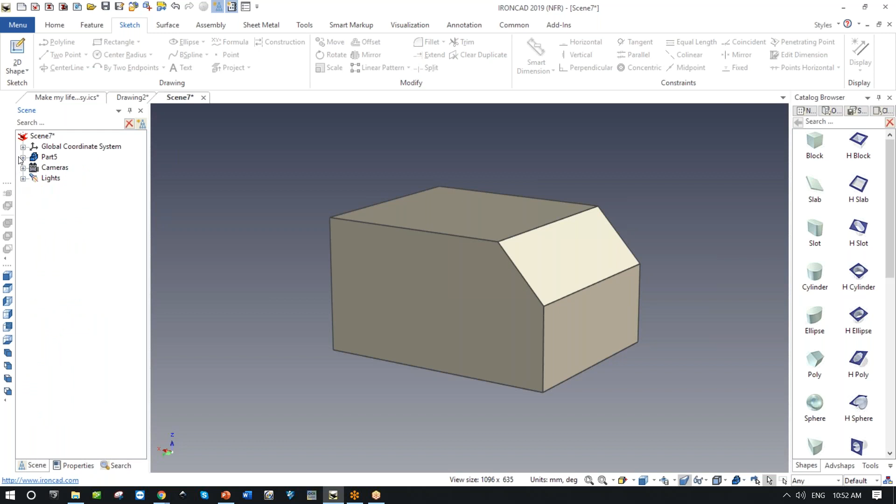Yeah, you can save the sketch. You have two sketching formats: an independent sketching format where you can bring in DXF and edit them, and the extrude wizard, which instantly turns into an extrusion. It has an option to save that sketch, copy it. So you always have the sketches if you want. Otherwise they'll consume them. You can have them or not consume them.

Right, and you can also save them to the catalog if you'd like. Just drag and drop it in from your scene browser. Perfect, that's exactly what I was thinking. Just like a solid shape, you can drag a sketch into the catalog as well. So to answer that question, I think it's a really good one.

If I do a sketch on an XY plane and don't really care, I'll just go ahead. Whatever this sketch may be, I'm going to put in a center and a radius. I love what Joe gave me, because the idea that I can come in here and say no, I want it to be 0.5, making a real little thing here. And then maybe just a rectangle, we'll do a little keyway or something and trim this.

And now I'm just trimming, just normal sketch stuff. By the way, for anyone interested, I might as well go there right now. If you live in the world of parametrics, all of that is available to you. I could say I want this fixed right here - that circle is now fixed. I want the distance, I want this always to be a horizontal line.

Ooh, what did I just do? Undo that. I'm going to lock that as perpendicular, lock that, and lock this one as well, so I want those to stay perpendicular. And now I want a smart dimension on this - can I do that? From here to here, that's a smart dimension. Make that 0.5. Can I? Beautiful, okay, and I need one more smart dimension from here to here.

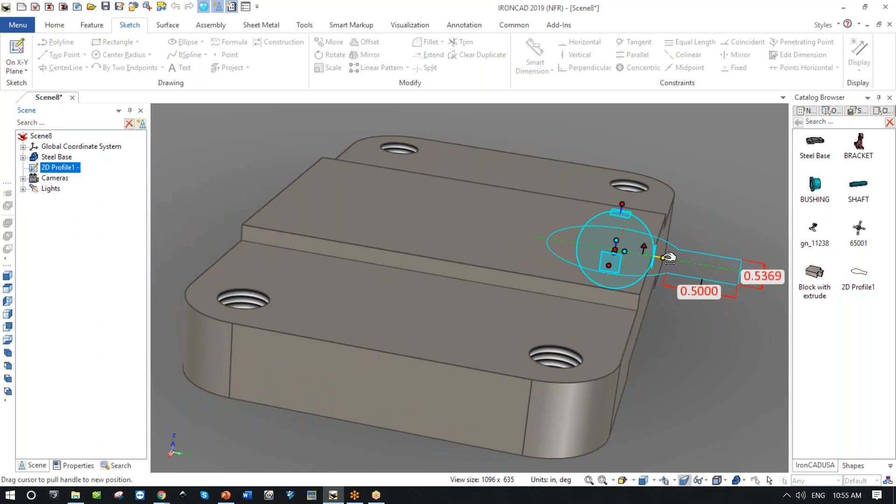There you go, a 2D profile. So at any time, I might be able to say, get rid of you, delete you, come in, grab this, and that's big, and then grab my little profile in here, put that profile, move it over. And now I've got a profile, which is, oh, this is actually a silly profile, because what they said is

This actually needs to extrude that way. And so if I come in and the profile is highlighted, what can I do with the profile? I can extrude. I want to remove material from this part, dragging it out, say, okay. And you'll notice I'm not being real careful, because I just wanted this, sorry. I wanted to be able to grab this and just pull it all the way through. And now I've used that sketch and even put it through on an angle. And it's saved forever and ever.

You cool with that, Matt? Yes, thank you. No worries.

And I believe you'll notice what happened, folks. I deleted the sketch, but now the original parameters that were in that sketch are now still here. So as I say, for later work, you'll be able to use a lot of this kind of work for that. So we just did that sketch. I'm going to leave it there, kind of like it.

And something happened for my newcomers, beginners, I want you to see something. I'm going to undo so you can see. We're going to undo. There, it's flat. Now notice there's a 2D profile here. It says it's a separate profile.

If I come in and say, well, I want to use that profile to extrude and remove material, or say add material. Yeah, I want to add material here. I want to add to this part, and I want to add a quarter inch.

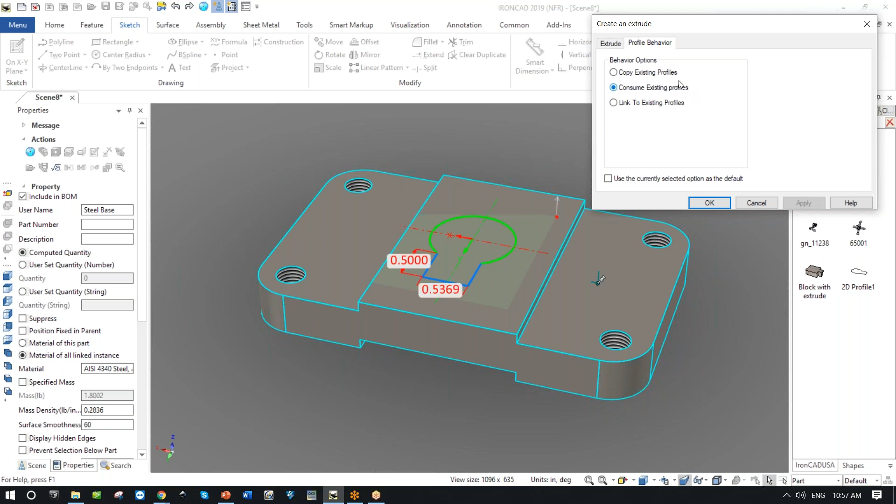All right. Now I want you to notice that there's something really interesting about this profile behavior. And it's located over here and over here. I can consume the existing profile so that the profile becomes part of the extrude feature, or I can copy it and leave it there. So when I do that, I say, okay, go ahead, do that. I've created this little guy here.

Why? Because it left it alone. See that? So that was left alone. Matt, it's over here, it's left alone here, and it's part of this extrude. You getting the difference? Yes, very good.

Okay, and of course those distances now are again part of, see, now the sketch, those parameters that I use, they're here, they're available for me on the screen. And I forget who, I think it was you, Brian, who asked that. You know, these are what I'll get at a later date, that we've got some pretty cool capability. And you'll notice there was the original, so I still have the ability to go in there and change those and do other things as well.

So, by the way, what I'm working on right now is kind of an assembly mode. And I really appreciate your question, Matt, because it shows me that, well, what I just did, I'm gonna do a quick assembly for y'all, because remember, what we're looking at is working with geometry, sketching, drag and drop, and direct edit. And gosh, you just came up with, I love these sessions that do this. But let me come into what else, you know, these shapes, this drag and drop. So you just saw me drag and drop a profile and put a profile on there, but I can use this not just for creating new geometry, I can use this also for actually doing assembly modeling.

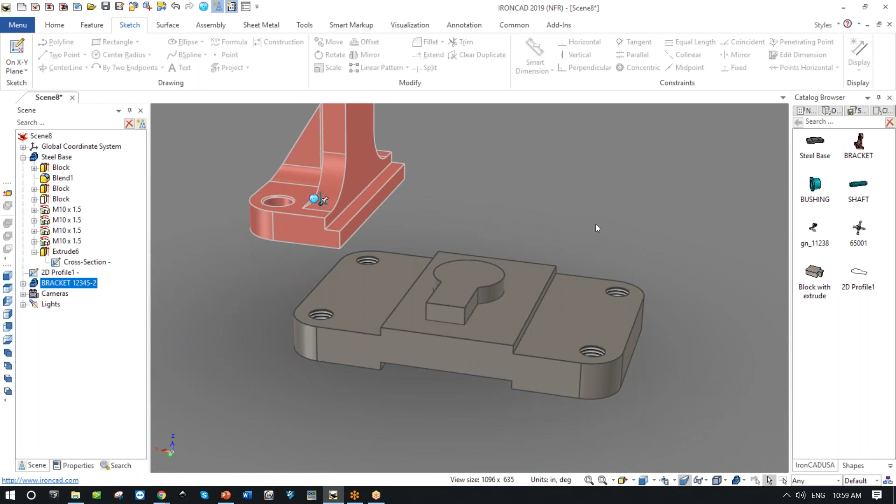And for those of you who have seen this before, here's a quick one. Reset that TriBall to the anchor. Actually, no, I want this TriBall. And if anyone's interested in learning more about the TriBall, we did a TriBall webinar yesterday that will be posted after this on the IronCAD USA site.

So take this to a point, and now move this point to a point right here. Okay, now I'm going to undo that because Joe taught me something that I thought was really neat. And if I want to move this TriBall around the screen, as you can see, kind of neat, but I actually wanted at the center of this face here, at the center of the line. Well, right click, whenever you say find an edge, no matter where I pick on the edge, it will take it to the midpoint of the edge.

That's really useful, because there are times where I can say, I want this TriBall to be on this edge right down here, and it will place that part directly. That's kind of a neat way to work.

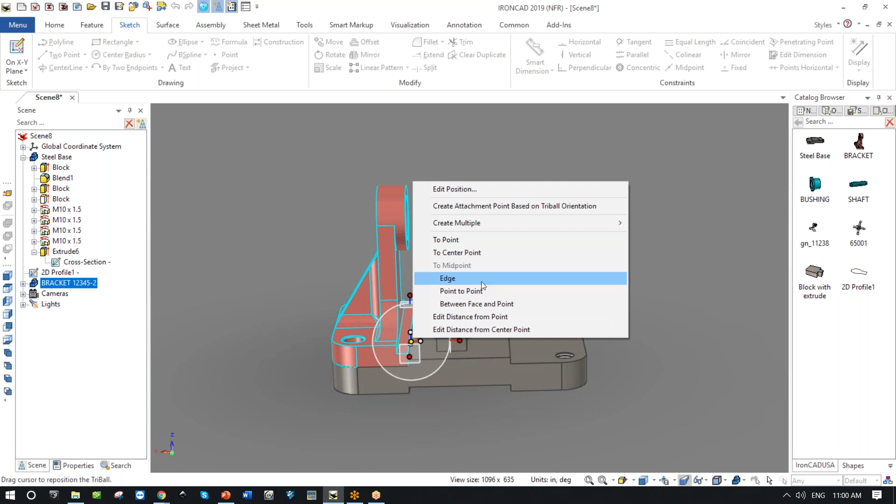So we're using drag and drop modeling to create this particular assembly. And as I showed yesterday, the TriBall is extremely useful. Unlock the TriBall, and as Matthew knows, I'm using my Mamba mouse to just put this thing in, and then create a mirror copy of this on the other side that is linked to this.

And of course, using that, I can use it. We're doing it very fast. Anyone who's done any assembly modeling in another package will see I'm not really worried about how, I've got the TriBall that helps me.

If these things aren't in the right position, I can simply use the TriBall and say, move along this line and place this point right at the center of that circle. And I happen to know that puts the shaft exactly in the right place. So I'm creating an assembly.

Really neat. That lets me do something else. Because I'm running out of time, I'm not going to finish this assembly because I want to get into one last thing before we move on. And that is a bulk drawing. For those of you who haven't worked with the bulk drawing capability, it's remarkable.

So I'm going to come in here, say, I've now created an assembly. I made a change to this part. I put in these two parts. I put this part here. I haven't constrained them yet. Haven't done any mechanisms. I want to create a drawing.

Save it. I'm going to call this one Charlie, naming it after Charlie. I see your name up there, Charlie, so I'm going to name it after you. And this is now Charlie's file. And I'm going to go in and say, I want to do a bulk drawing.

And what does that mean? That says, Bobby, you want a picture of the scene? Yeah, but I also want a picture of this, the base, the profile. Do I want the profile? No, I don't want the profile, but I do want to see this bracket, and I do want to see this shaft. And with kind of that work, I've now gone out.

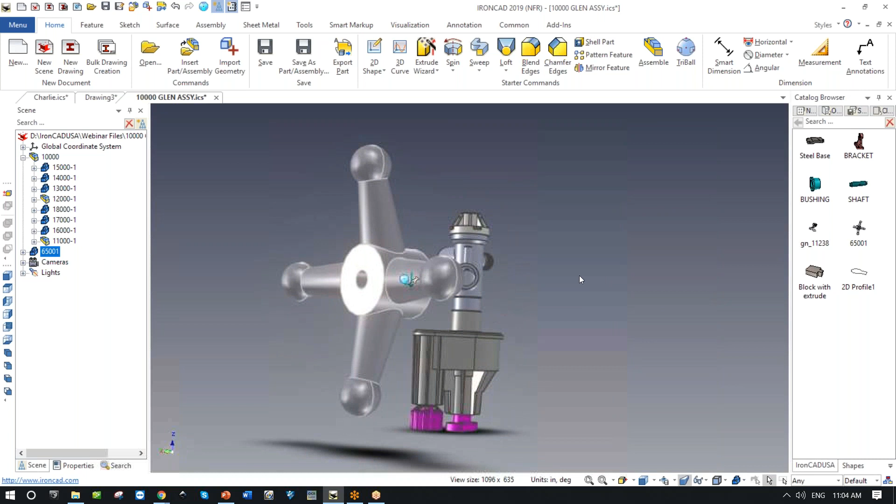Yeah, I happen to know that this particular part, and for those of you who were present yesterday, this is a non-native. This came from somewhere else. It was very similar to, for example, this part that I grabbed from a catalog online, for those who saw it yesterday. And our capabilities for direct edit are pretty magnificent.

The idea that we can just grab any geometry and make changes to that geometry in a way that's quite remarkable, because it's not just taking the geometry and changing it, but we can even change sort of, and I've not done what I'm about to do. So I'm trying to see, will this allow me to do this?

Oh, it is actually. These are different pieces. So all of these different things, if I want to offset and change, I'm just going to try and see what happens when I just drag this. No, some of these, it took it apart. So some of it will work. Some of it may not work. It's kind of a goofy sort of, and I haven't tried that before, but I tore that one apart.

I'm glad. I always try this with different files that aren't my own files, to see how well it works. For those of you who were with me yesterday, the idea that I can pick on this face and just do something like this is kind of neat.

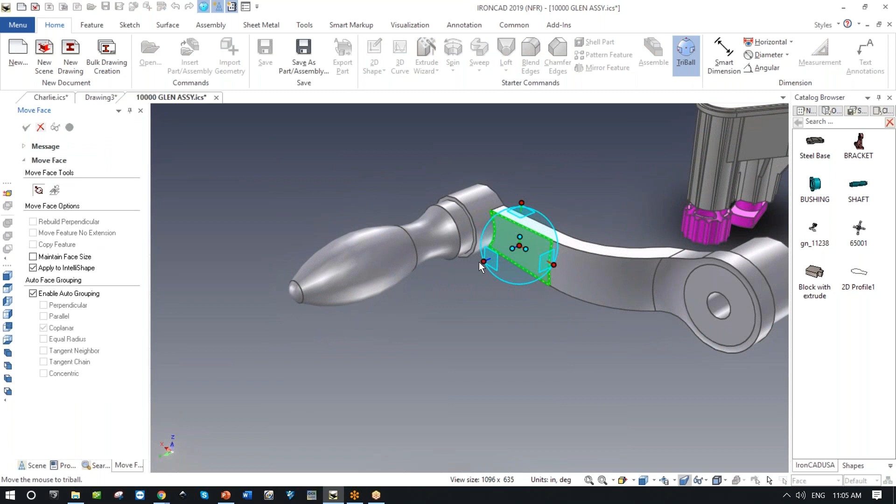There was a direct edit on that, using the TriBall and the idea that I might want to just pick this up, drag it out, and rebuild the perpendicular walls. Of course these come out as well, so you can see this direct edit. The examples I'm showing you are perhaps not the best.

By the way, these wonderful keyboard keys, isometric, double click, it's on the screen. For those of you who were with me yesterday, you saw the idea that I can pick up any part of these, and here's a neat idea.

I want to highlight down here. This is the pick selection filter, okay? That's important for y'all to know, because if I point at this, it picks the whole part. If I point at it again, there's the next part. I don't want to click that many times, so I'm just going to say face. I just want to highlight, pick in a box, all these faces, shift select this one, shift select the inside.

Matt Tuckfield, who's actually part of this webinar right now, he's worked in other products where you need to do this in CAM a lot. The idea that you're taking something and removing it, or you're taking something and saying, I need to move this part because they've had a change. I don't have the original SolidWorks geometry. This came from, I don't have it. All they did is give me a dumb solid.

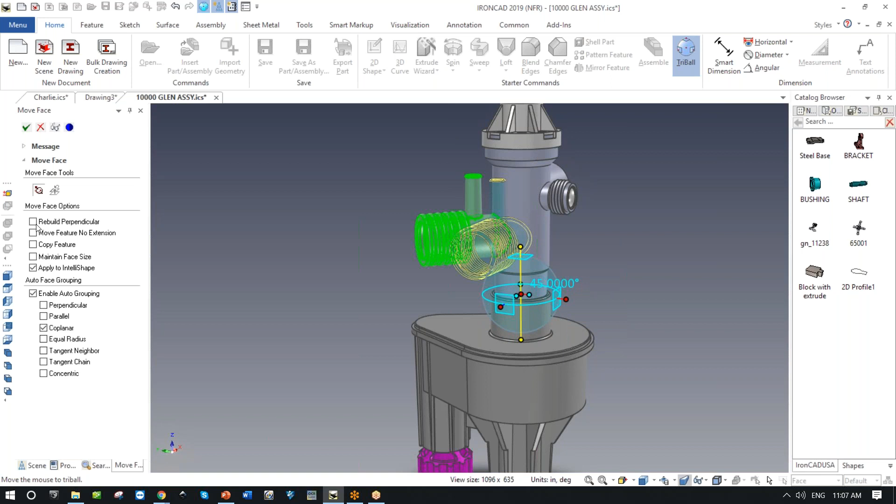So we're able to take this dumb solid and simply rotate it around, as I did yesterday, 45 degrees, but rebuild all the perpendicular faces. Not only does it rotate it, but it moves everything correctly. It rebuilt all of this geometry. And that brings me back to this idea.

There are 3 specific ways that you can work in IronCAD. Number 1, drag and drop, that you've seen. Number 2, sketching. Number 3, the direct edit. We've looked at streamlined sketching, unconstrained sketching, and everything I've done I have created constraints. Someone may ask, well Bobby, why do you do that?

If I'm going to build a family of parts that are going to be used again and again, you look, and now this is an area I've shown you some examples of IntelliShapes, but folks, you really need to drill down. These are far beyond primitives. They're incredibly smart. I'm going to show you one example, then get off it because I don't want to bore y'all.

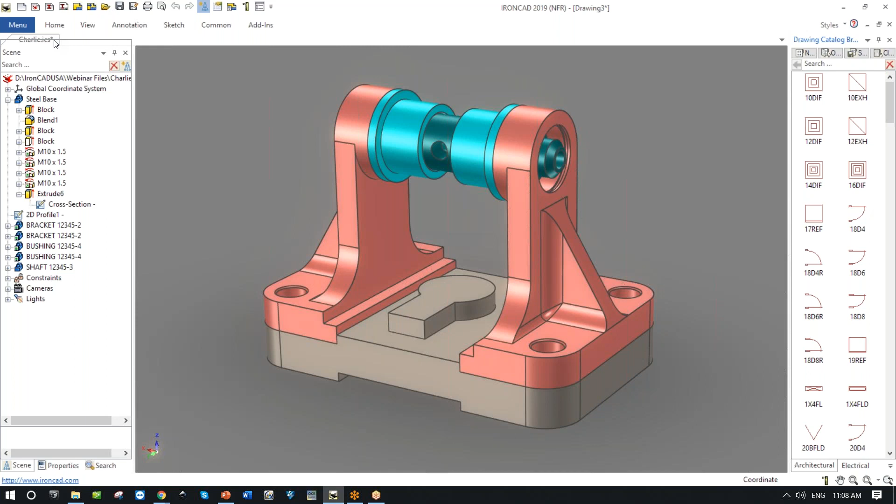Matt Tuckfield, I'm specifically addressing you because I know you work in other products that have something that may be considered a primitive. It's not even close to what an IntelliShape is. The reason I want you to see that will become apparent in a moment.

So I'm going to go into a 3D scene real quick. This could be Bobby's scene. I'm just going to start out with a very simple shape, and this to me is one of the most fascinating things you can do, just a simple cylinder. It's an IntelliShape, so there's the intelligent shape.

So what does that mean? Well, let's look at it. What are the properties of an IntelliShape? All right, this doesn't mean much. It's called a cylinder and links to shapes in the scene. By the way, Brian, I think it was you - links to shapes in the scene. There's a way to actually link it, and we'll talk more about that.

What is the size box? How does it actually work? There's lots of parameters. I'm going to be having a course specifically on this, so I don't want to go into too much detail. I'll be having a course on anchors and how they work, positioning, that kind of thing. But this is really important.

This is an IntelliShape. What I'm going to do is say I want to shell this, and the wall thickness is 30 thou, right? I'm in an inch. Okay, good. And do I want the start section open and the end?

So let's just see what I did here. The first thing I did was create a shell IntelliShape that automatically shelled itself. What else can we do with that IntelliShape? Well, it can have lots of other things. Shelling was one of those things. It could have formulas and all sorts of magical things.

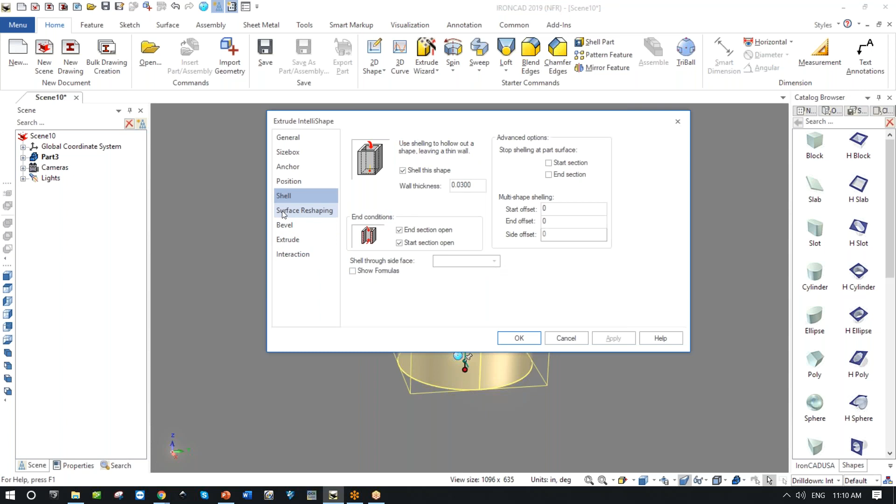What about the surfaces? Do I want to tape? Do I want to reshape it? Do I want to put a cap? Do I want to put a taper? Do I want to match it to some other shape?

This is way more advanced than I want to get into today, but I love the bevels. So what I'm going to say is all the shelled edges, whatever they are, I want to put a little blend, and it's going to be 0.0625. Will that work? Let me apply that, go. Did I get that? Maybe I did something wrong. Let's see. Blake, if you see me going crazy, you just tell me.

Oh, I made it 30 thou. I'm making it too big. That's why. Blend that and do the same thing on this. Well, why not all edges? All edges blend, give me, I don't care, 10 thou.

That's great. And make sure these others are turned off. I don't want that one. So all edges. Do you know why that? Intersecting edges, anything that's intersecting. Do it. So do the end and to the start and end. Just do those two, okay.

Turn this off, and you say start and end. Do a start blend of 0.01 and an end of 0.01. Okay, apply that. There we go.

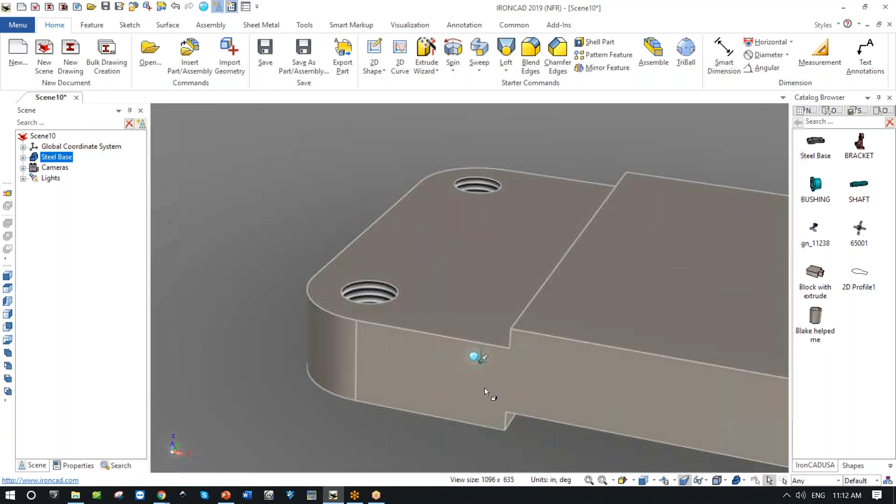But what this allows me to do is now, okay, I'm going to call this... Blake, help me. So I'm giving it an exception, you know, a great name and putting it in here. And now, anytime in the future, I can be working on parts and come in here and go, okay, gosh, I need to put in this. I want it to go right there.

And what has happened? I've actually got an IntelliShape that lets me change, alter, modify, you name it. And look what's happened, it's already shelled. It's got everything that I need done. And if I want to push it into this part, make it part of it, great. And now, of course, it's part of... Blake, help me. I didn't make it part of, actually, that was really interesting, that it's a separate part. I could have done this. I'll do 2 examples to show you all.

So there's a separate part with all that, but now if I grab this, let me do that one. You'll notice what's different about this one is this one became part, because I just used the feature. It became part of this design. So I've actually created, and of course the rest of it got consumed, by the way, and if anyone wants to see that, it's kind of really neat. I'll go into tools just to show you, an advanced use section.

Give me a section parallel to this face right here. And so what happened with that, anyone who has seen this before, it was consumed and became, there's my cylinder, and you can see I was able to, and you've got our little fillet up on top, which is kind of neat that we did.

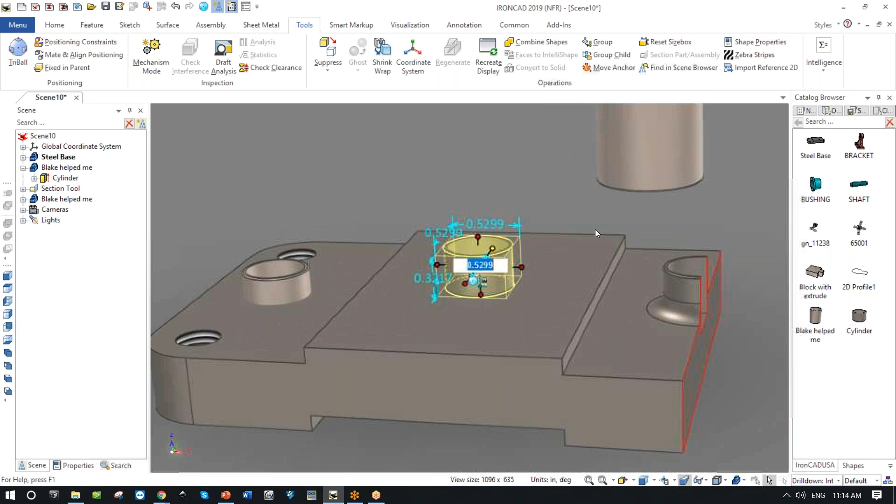So we took a very simple IntelliShape and we made it pretty incredible, okay? A, as its own standalone part, or B, as something that would be used as a feature in another part. So it's kind of really neat. And by the way, if I stick it all the way through, there you go. I've got this all the way through, and that's actually neat.

There's a reason why I'm really excited to show you what I just did here, because I cut through a solid part with the shell, and it actually used that. So it actually shelled through, and top and bottom has my little fillet that we put in as part of the feature.

So jumping back real quick to my IntelliShapes Deconstructed, believe me when I say there's huge power in the IntelliShapes and what you can do with them.

Finally, this direct editing, I've shown you some of that, and there's a complete webinar on that. And there's also a webinar on the IronCAD TriBall. So these are all available. You've seen every single one of these. The feature modeling is available on our IronCAD USA webinars page.

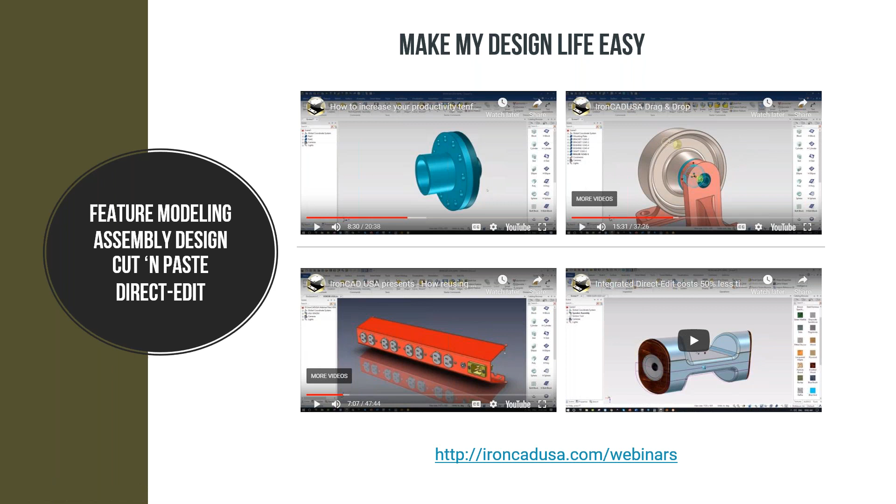The assembly design that you've seen, how to, and Matt Tuckfield, if you're interested in looking more about how you can use profiles, check out this cut and paste, because we actually cut and paste a profile between different parts, which is neat. Excellent, kind of a neat one there.

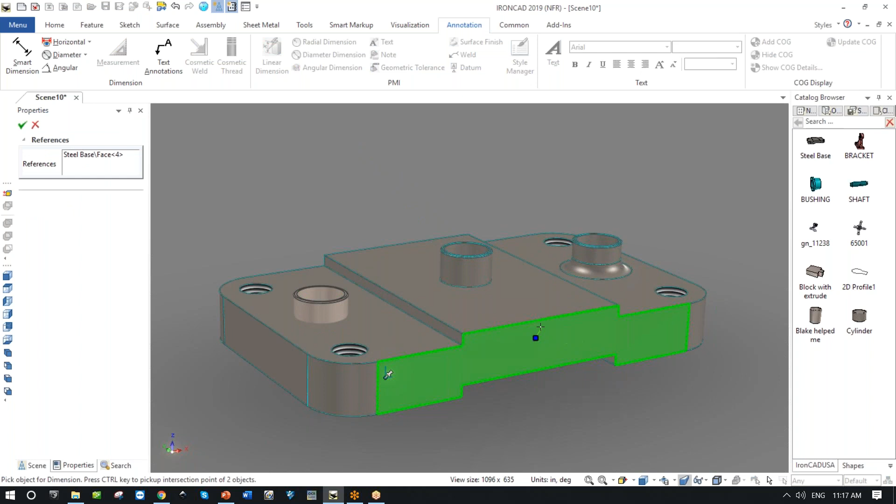So one of the questions was the PMI, and I do want to go back to that because I've had a lot of questions. Yes, there's a full PMI. And the interesting thing about the way PMI works, if I come in, let me just see something here. Once you've actually done one, and I did a silly one right now because I wanted you to all see that PMI is divided up into different views.

There are rules and structure behind product - what is it? Product manufacturing information, I believe. But if I come into this PMI, what have I got here? Let me open this up. I put in a silly linear dimension that I'm going to delete, but it came under the view XY.

Now, each one of these views, as you can see, I'm double clicking on them. So in theory, when I'm putting in PMI on the XY plane, this would be set as active. And I think that's the way I got to do this. Let me just see - yes, set it active. So now I am actually working in this plane, and that's what's important to know.

So that if I put geometry, dimensions, and I come in and say, well, how big is this? It's going to be on this particular plane. Or if I say, okay, from this point to this point, it's on this particular plane, and so on. If I'm done, that lives, as you can see, in the XY. And if I double click on the XY, it will automatically go to that view.

If I want to put geometry into the YZ plane, I'll go to it and activate, set it as active, okay? And now any of the linear dimensions that I might say, go from this point to this point - hey, where are you? Why aren't you, you goofy little guy, where are you? Did I do that right? I am view, double click. Yeah, I'm there. Let me just make sure I get this right.

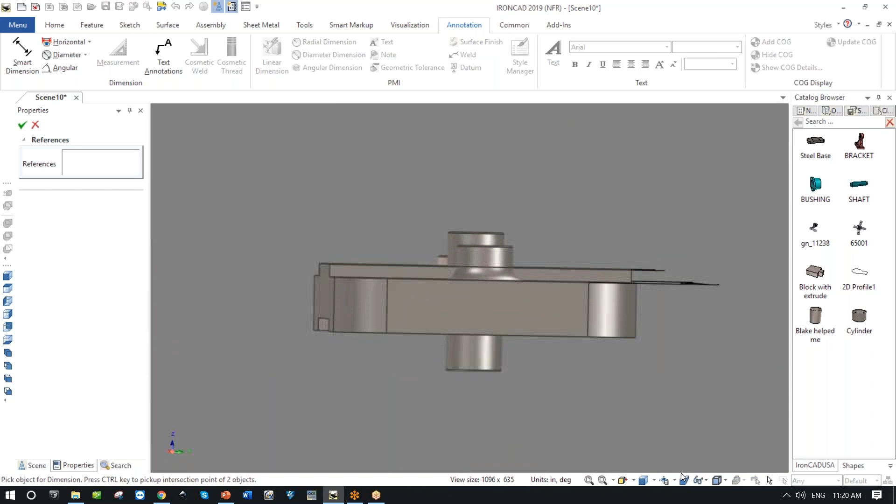The other thing that's given me trouble with PMI is making sure you turn your perspective on and off. I'll show that down here. That's another one of those little keys that can mess you up, because you think you're picking on something that you're not. If you're working in a mechanical scenario, you want this, and you'll see it even more sharply when things are... see that I'm actually seeing it as if it were there, but it's not.

Another quick idea I wanted to show you, since I use this quite a bit: if you want to look at a particular face, use the F7 key. That's super powerful. Anytime you're looking at geometry, F7 lets you look at the front or side, or go look at a particular view. I don't want to spend too much time here—if it doesn't work quickly and easily, I'm not good. Yeah, that's what I wanted to see. So that's a quick PMI trick, good enough, I'm going to get out of there.

Notice now that these dimensions live on the XY PMI, and this one lives on the YZ—you can make different ones visible. I'll do one more as an example here. What might I want to see? I'm being goofy, but let's go from here to here just so I can see it. Done. Now I'm adding it, and it's being controlled under each of these views, so people will need to see this directly, and this. That's a quick way of doing that kind of work.

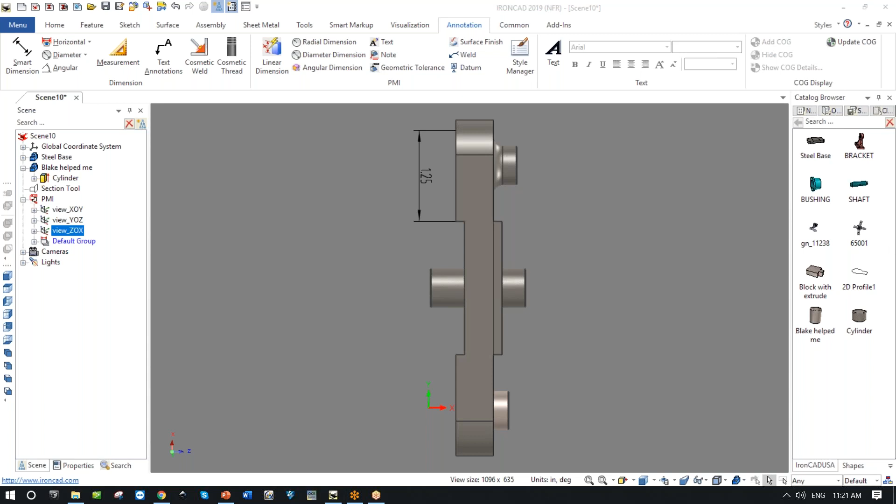Did that answer your question? Who was that, David? Let me see if David's here—I've blanked everybody. That was a question from earlier that David had. We'll see if there are others.

That was a question about automated CAM packages we would recommend. Officially, IronCAD recommends SprutCAM, but most of the IronCAD USA group represents ZW3D, which is an excellent CAM package—we integrate very well with IronCAD. Let me look through the rest of the questions. David, yep, he wanted to look into some IC mechanical, but I see David's left, so I'll contact him and come back to him a little bit later.

Let me see, Matthew, what else? Matthew asks, Bobby, can you make an example with a sheet metal box and a pyramid hopper? Yes, you and I will do that so it auto drops in the origin. Actually, Matthew, I want to teach you about anchors and things like that, which is more complex than I have time for today, but I'll teach you one-on-one, or if anyone else is interested, in a kind of advanced course. Let me just see if I've got the tank example.

Here it is. This is an example, Matthew, of these creatures I'm putting on the screen right now—this is how Blake was talking about using parameters to create different sizes of parts. For example, I'll use the third one, and these parameters have created this tank. And if I grab a ring and put it on, how does it know where to go? It knows, Matthew—not only does it auto drop, but it auto sizes. So if I look at the part and say show me the parameters, these are all set up so they become equal to each other, and it's actually quite simple to do.

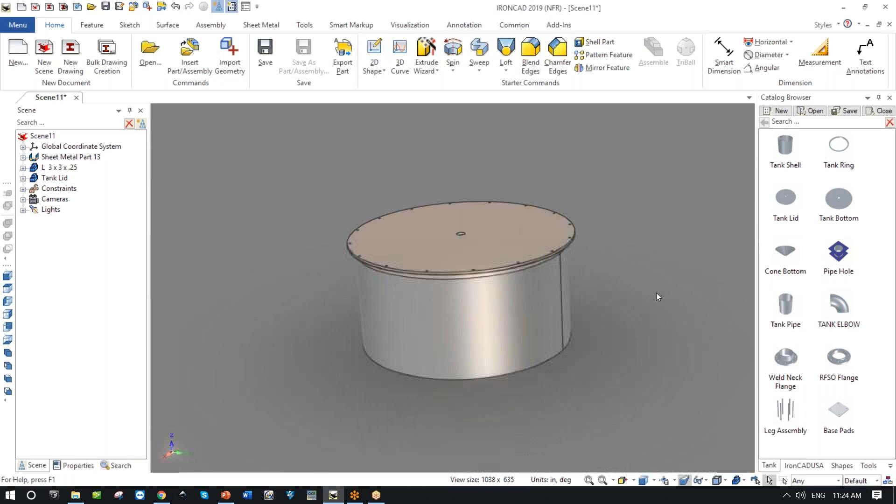If I put a lid on it, notice I'm not coming in real close—it's putting these things into position in a really neat way. Grab a bottom, put the bottom on, and it's auto dropping and auto sizing. I'll go ahead and put a leg assembly on there too—grab that, done. If anyone's interested, I can look at the parameters to see how many legs it's supposed to have, the leg assembly—I just need to see where it says 3 or something. If anyone else sees it before me, there we go.

Rather than spend all my time looking for this silly parameter, you'll just have to believe me that I can change it for now. But you'll see that's a big part of what we do, and there's a lot of intelligence built into these drag and drop things. Just so you understand what I'm working on here—you can do this very easily with these shapes, because they come replete with something called an anchor.

These anchors can have something quite magnificent called attachment points. We'll talk more about attachment. Attachment points are an advanced feature that are... where are the attachment points? Under tools, intelligence. We can add intelligence here where I can actually add an attachment point to this part.

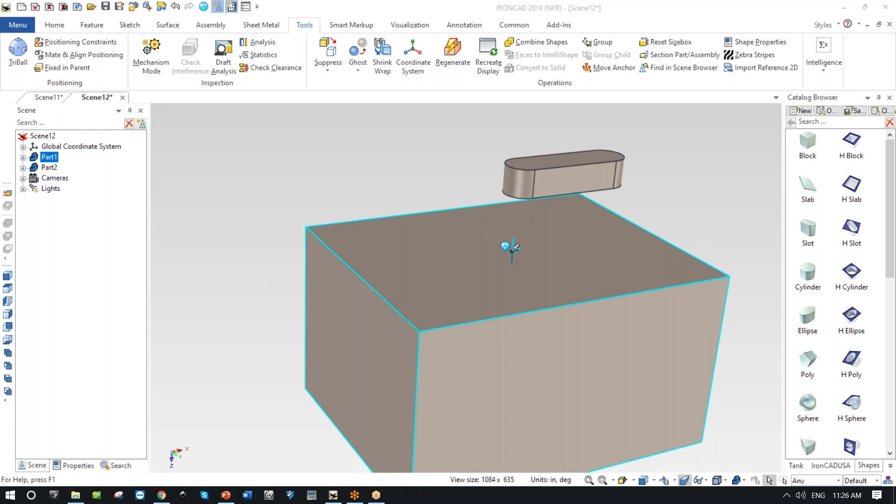I should mention, though, that if you use a TriBall, you can create attachment points based on the TriBall location, just in case it's not on the surface of a part. Oh, that's really cool.

If you want to put it like a hole or something like that, you would use the TriBall to do that. So if I put a hole in this part, like this, and put the TriBall there? Do it at the part level instead of the feature level. So go up to the part level, and then use the TriBall, move it to that center.

Anyone working with the TriBall, I love this little feature - you hold down this and it makes it perpendicular, which is kind of neat, and move this. If you look over here, you can see the Z axis down there. Z is blue, or if you're Canadian, it's Zed. I'm going to move this now and go to this center point right here and lock it.

And now I want to create an attachment point. Oh, sweet. I'm just calling it Connector 1. I don't care - oh, that's very neat. Okay, so now I have a connector here.

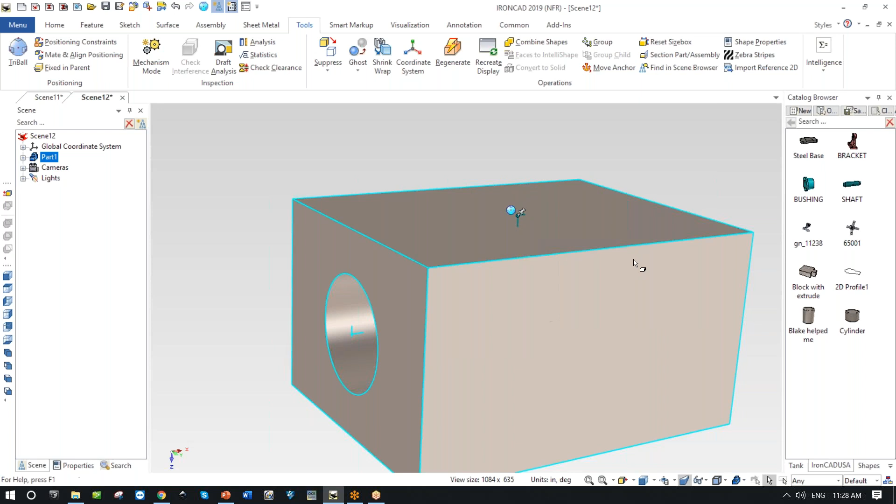So just real quick, I'm going to take this, my silly part 1, and drop it into here. We'll spend some time on this kind of work. That part now has an attachment point. If I bring it out and drop it there - what's going on? Why is that not hooking up?

Ensure you did the naming for the attachment points before you drop it out. So if you're doing like a male to female, or just neutral to neutral, go ahead and edit that attachment point. I didn't see you do it, but that's my bad. Click on the part first. There you go. Right click.

So currently, right now, it's not paired. Yeah, so go ahead and make it neutral. And then good - just so you know, I've got that sitting on the screen.

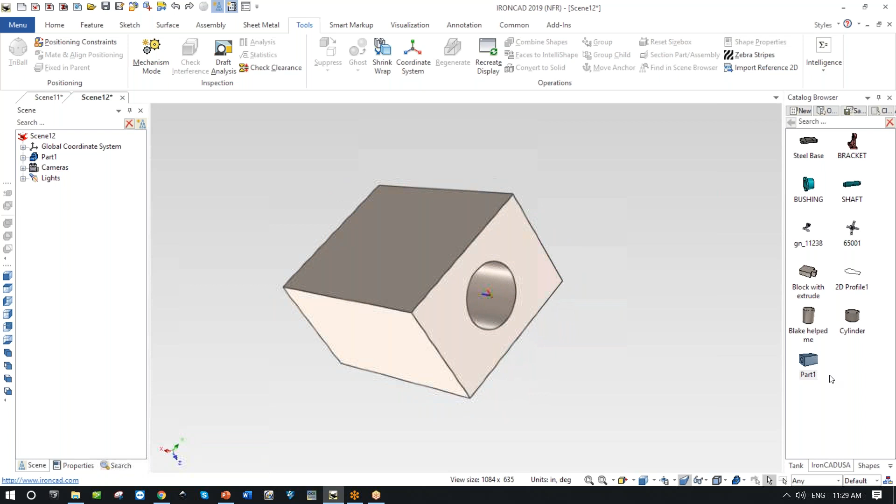This is an interesting idea, folks - I'm going to cover this in a more advanced class. I'm actually going to edit this one in its own space because I realize that this attachment point, sitting right there, I want to set the name and make sure it's the same. I'm just going to leave it like that now. And I'm exiting it and saving the catalog part in the catalog, so that now if I drop this out - notice what it just did? I don't even have to think anymore. You see that, Matthew?

Because now, no matter what happens, if I have multiple parts on there, I can drop them anywhere close and it will automatically snap directly onto that. So let's say the left block was your cabinet, and the right block is your hopper. You could just set the anchor point to the bottom of the cabinet, and you can customize the hoppers as much as you want.

Of course, and that was the whole idea. I'm just showing you with a very simple part, but this could be anything. This part could be absolutely anything we wanted it to be, and as I'm working on this kind of thing, I can make it as complex or as simple as I want, with all sorts of different things attached to it.

It's your thing, and now I've got it, I can show you how that works. I'd like to do that with you, just putting it in, and you can even have multiple points. That's the other thing too, when it comes in, it asks which way do you want to orient or align it, and that's a lot of what we do.

I don't want to go into much detail, but that's the whole idea behind how you would do custom piping and things like that. I have people that do this kind of thing where they bring in a silly pipe, whatever size, doesn't really matter, and now put a collar on that, bang, that kind of idea.

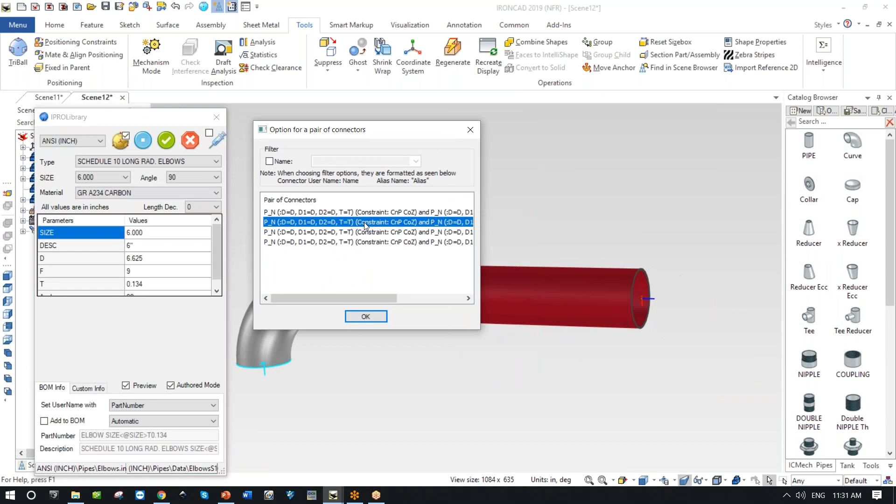Or I didn't want it to go that way, I wanted it to go this way — which way do I want it to go? Do I want it around that end, which end do I want? Do I want it facing that way, or this way, there?

There's so much that you can do with these attachment points, and they're really, really cool. Okay? And I will teach you how to do that. It's really not very hard.

And the important thing is, once you get your stuff set up, it's just simply that idea of coming back. I've built some amazing parts where I don't even need to be very accurate with how I'm dropping things.

As I said before, I put this one in, double click on it. No, I don't think I have any other. There it is. And if I drag another one on top of it, I've got two of them, one on top, as you can see — it's really easy for me to do that kind of thing.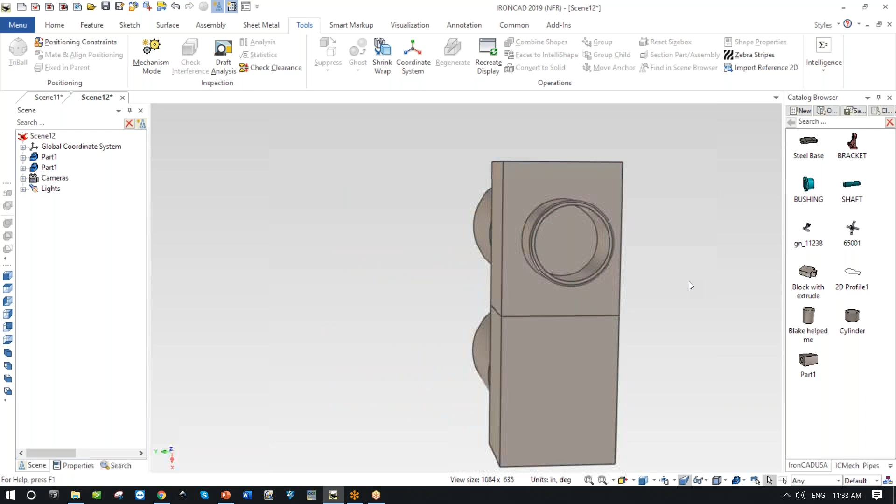Now watch what happens when I bring it in. I'm going to bring this in — remember we worked on this before? There's our little cylinder, you guys remember that guy we put in here? That's cool, that's our little cylinder that we built, but I didn't really want it there, I want it down here.

So now I've got to highlight that little fellow, and that's extra mouse clicks. I don't really want that, I don't want those extra mouse clicks. So what I'm going to do now is go right into this little cylinder and say, hey, I want you to attach the TriBall when you drop. All right, cool, what does that mean?

Put it here — oh, TriBall is already there for me. Yeah, move this right here to this edge, right there, that's where I want you. Cool, that's what I wanted to have happen. Perfect. And so now what I've done is created my new little part — this is my new part that we created. It's really weird, but that's cool. Yeah, sorry.